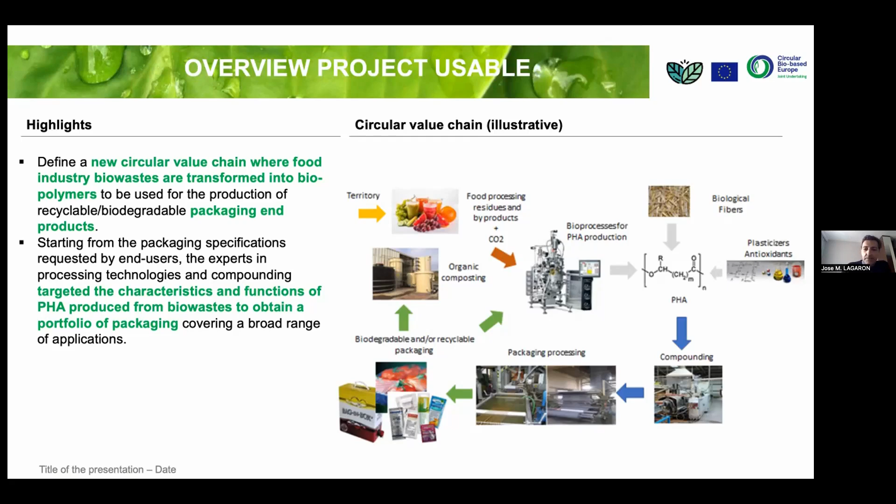The partners participating, as in this typical structure of projects, are based on large corporations that are actually challenging us with some of their existing packaging benchmarks, solutions, proposals or materials that are in the market, and that they are looking into how to replace with more sustainable solutions. And that was, let's say, we took the challenge from each of these large companies.

So the people who actually developed the technologies were SMEs, also supported by a number of research institutes and universities. So in total, around 25 partners from 10 different EU countries. And the CSIC coordinated the whole effort.

So the typical management structure of the project was also used, where there is the coordinator, a steering committee, strategic and general assembly, but then we also had an advisory board composed of companies that were not involved in the project, but were providing guidance and consultancy. And we also had a stakeholders platform that was extremely useful along the way, because they were actually judging the activities of the project from the outside.

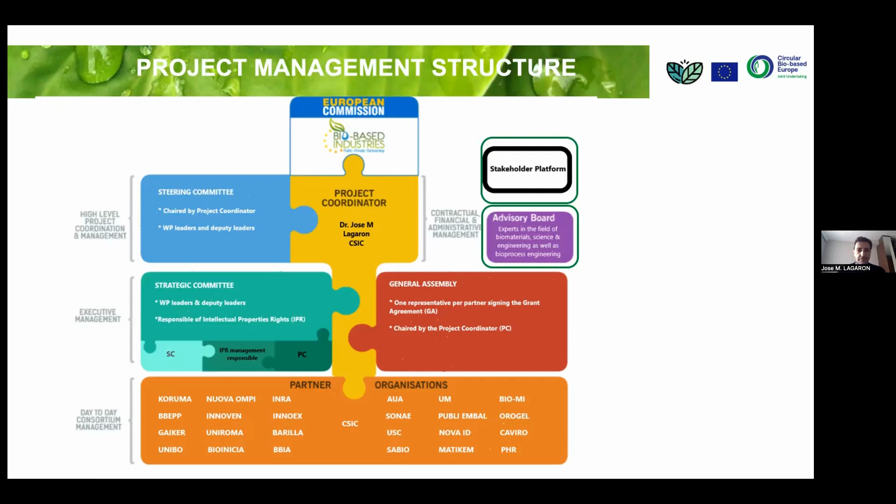The strategic orientation that the project took was based on the proposal made by the CBE JU program in 2018, which was to develop innovative bio-based products to identify market applications.

And then we cover all these activities of developing bio-based products, disruptive technologies that would allow them to show the properties required for replacement, and develop a fully integrated vertical supply chain so that the whole thing can actually work.

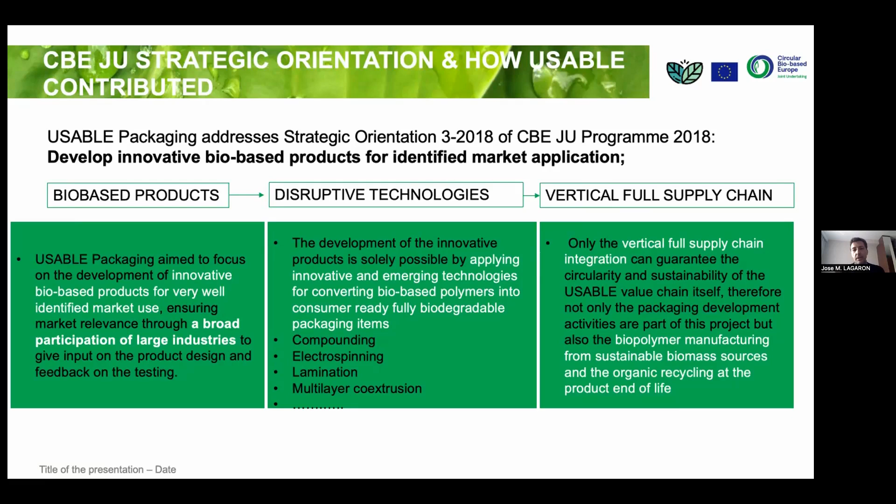So the objectives of the project were, as I mentioned, the creation of a portfolio, a toolbox of biopackaging solutions for a number of packaging applications, not only in food, but also in pharma and even clothing, bagging, etc. So the idea was to develop these biopackaging solutions with very clear end-of-life scenarios.

Considering as the main option organic recycling, but also making sure that if some of this packaging was not industrially compostable and eventually or accidentally ended up in the environment, that we would be able to know what the degrading times would be, etc.

And ideally, those materials would even comply with existing standards in, for instance, marine biodegradation. That is one of the main characteristics of PHA polymers - they are extremely biodegradable in the environment, and we wanted to take advantage of this particularity to make sure that was the case, and we did so within the project.

Additionally, the definition of a completely new vertically integrated circular value chain. We developed solutions to optimize and tailor the performance of these PHA materials to match, as I was mentioning before, the requirements for the end users, in this case the large industries involved in the project.

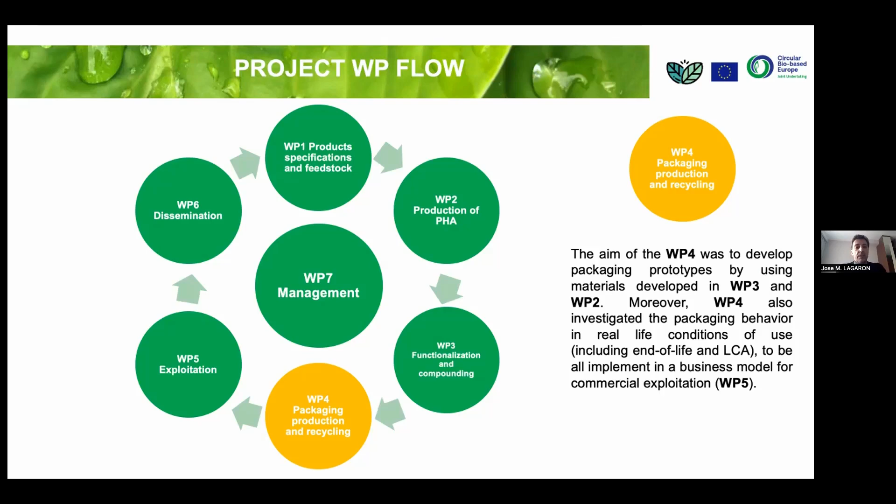Work package 5 was all about analyzing costs and potential commercialization scenarios. And work package 6 was dissemination, and work package 7 was management.

So the chosen prototypes are actually here, all of them, with the exception of one that we were not successful in achieving. It was an injection-molded detergent bottle that we were not able to achieve in the project because of the limitations on the material properties we obtained with the products developed. We understood at least what the requirements were, and this is an open technology that will be tackled separately in additional new projects.

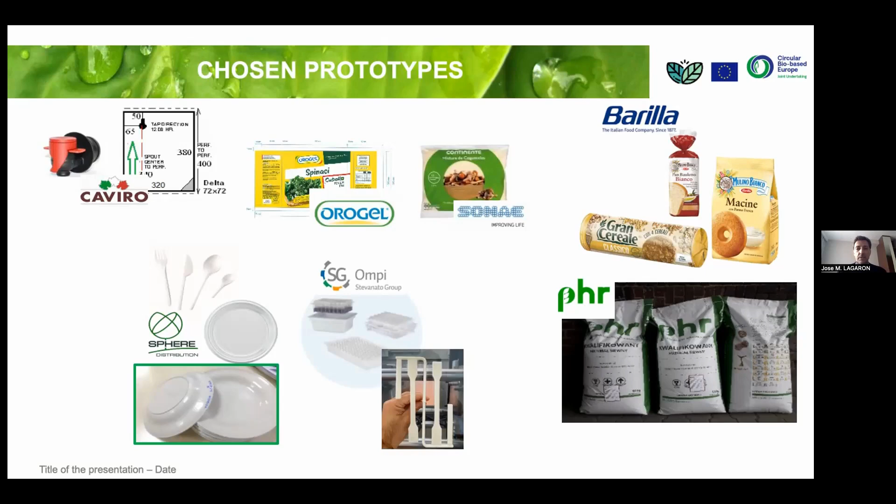But we did succeed in obtaining different POCs for bag-in-box applications, for frozen foods, for packaging of pharmaceuticals, for reusable disposables, bread packaging, and also woven fiber-based bags for seeds and other applications. I will just show in a minute some of how we achieved that.

In terms of the single-use plastic directive, it was really hard on our project, because eventually they consider PHA not a natural polymer. We complained a lot, we wrote letters to the European Commission about it, etc., and we got positive feedback from them, but eventually this material could not be used. So what we were intending to do then, in cooperation with the company interested in this particular application, was the development of reusable plates. Along the way we modified the target—it was a moving target because we didn't know how the directive was going to hit.

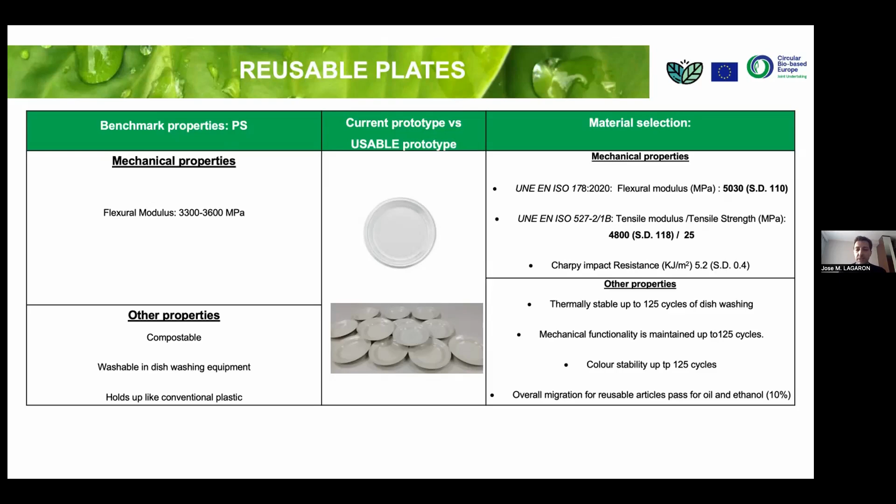Eventually, as I said, it was not positive for the application, but in any case we were successful in achieving replacement of existing polystyrene plates with very good mechanical properties. More importantly, we were able to show that these dishes could withstand at least 125 cycles of washing in washing machines without significant compromise in properties. Overall migration was also met in some cases, and we developed different formulations containing more or less additives that were naturally based or of cellulosic origin, coming from wastes, bio-wastes, etc. My family has been eating off those plates for more than 2 years. We wash them with the rest of the kitchenware, and they're still working fine.

Then there was the bag-in-box application, which was extremely challenging because it required an oxygen transmission rate which today is obtained by combining different materials—metallized PET or EVOH, high barrier polymers in general, and low-density polyethylene, etc. The critical parameter was to obtain an oxygen transmission rate better than 1 cc per square meter per day, and we were successful on that while relatively maintaining the same thickness. It also had to be sealable, and this was all achieved—our OTR was in the range of 0.36, so that was very good.

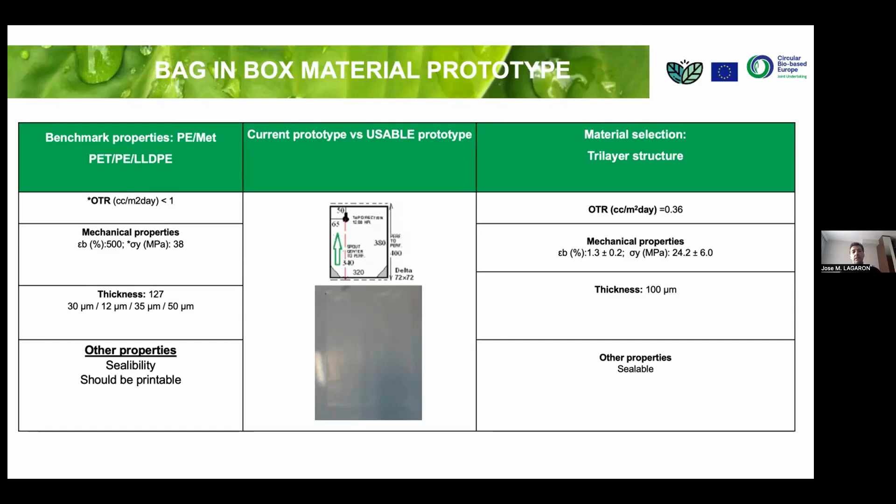In the case of frozen bags, the requirement was sealability, printability, retaining lower thickness, protection, and the ability to produce skin packaging so it would also protect from light, etc. We were able to achieve that, and on top of it we provided antimicrobial properties. It was tested by a supermarket chain in Portugal, Sonae Group, with Continente Retail in the group, and they were very happy with the performance of the material.

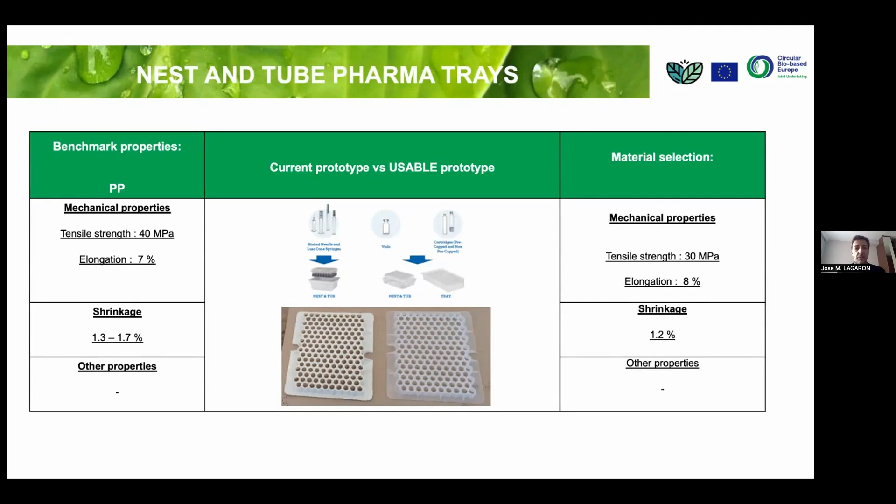Nest and tube pharma trays were also developed by injection molding, and it was extremely amazing how the team involved was able to match the mechanical performance of today's existing product based on polypropylene. Even the shrinkage performance was lower than the existing one, and the large company was very pleased—they said the material processed very well and they would see no issue using it in their conventional injection molding machines. Over 225 pieces were produced.

Of course, in this case we could not use the polymer derived in the project because they had to use 100 kilo—it was a 100 kilo application.

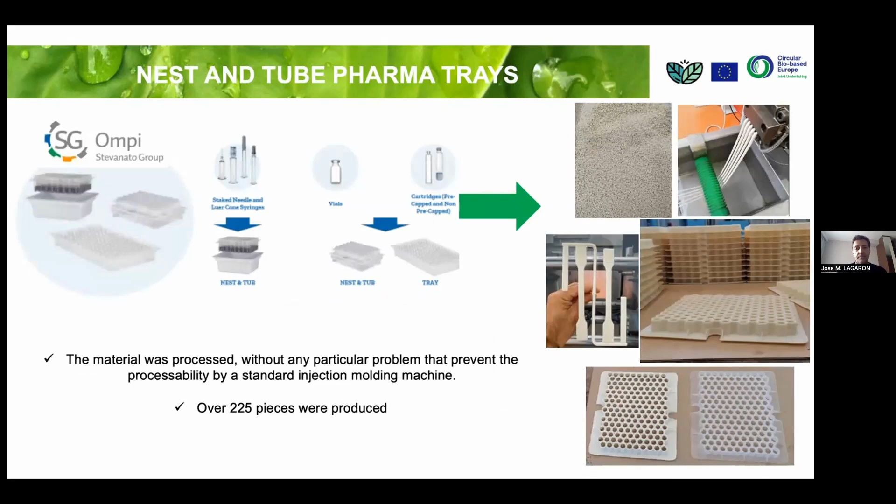In the case of woven bags, it was also a POC developed. It was very challenging because we did not expect the difficulty, so we had to modify even the structure. We had to incorporate other partners that were not initially devised in the proposal to be able to generate filaments and weave them. Even though we were not able to produce a complete pack, we proved the concept, and that was also successful thanks to the effort and ability of the consortium to stay flexible in the face of adversity.

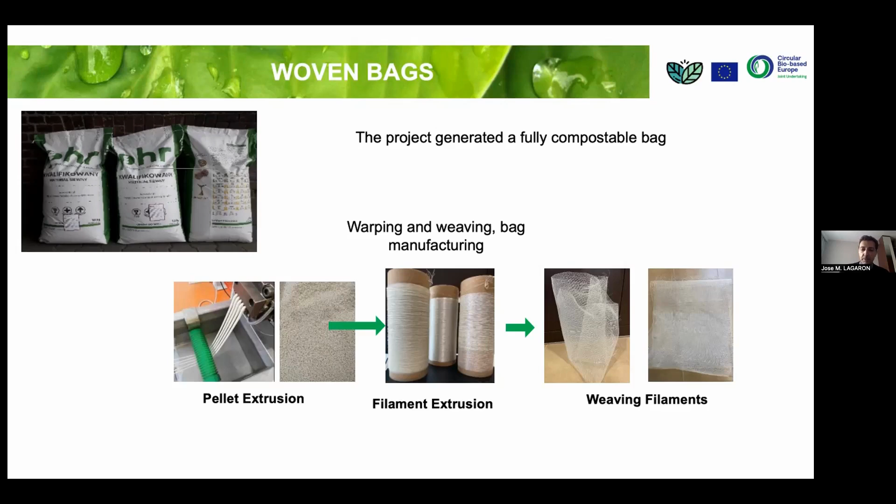Not to mention, of course, that we, like many other projects, were hit by the COVID-19 pandemic, and we had to really work magic to be able to overcome some of the challenges created by this unique scenario.

We were also able to develop bread bags. In this case, it was all made with the PHA that was developed coming from reground pasta.

So it was a completely circular scenario where the residues of making pasta would be used to actually make the packaging that eventually can be used for protecting bread. The challenge there was to get the water vapor transmission rate that is relevant. We combined a disruptive technology with a challenging lamination and film blowing strategies, and we were able to achieve, at least for the bread bag, the barrier properties that were required, and the mechanical performance was acceptable, along with sealability. On top of that, we were also generating two prototypes, one with antimicrobial properties and the other without, with an antimicrobial and antioxidant performance.

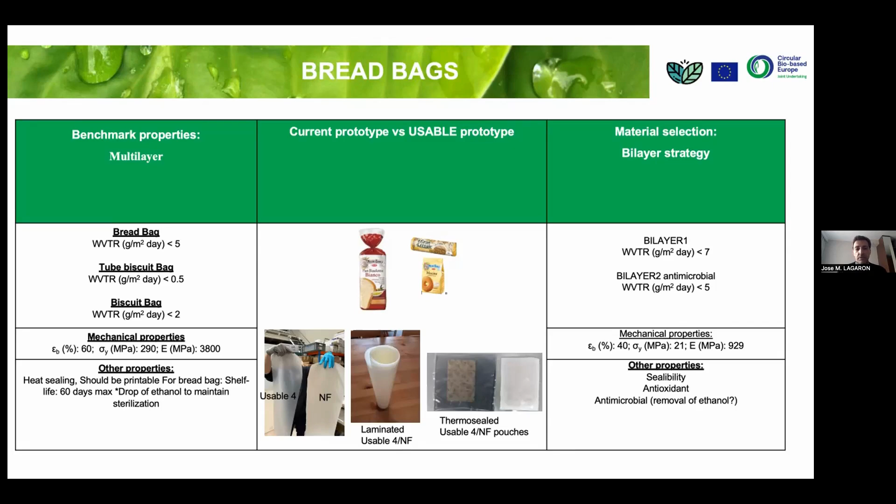So that would be an additional bonus to what we were challenged with at the beginning of the project. And that was, I would say, one of the most challenging applications that we targeted, because there was this disruptive technology involved that was never used before. So on the overall, out of all of these challenges...

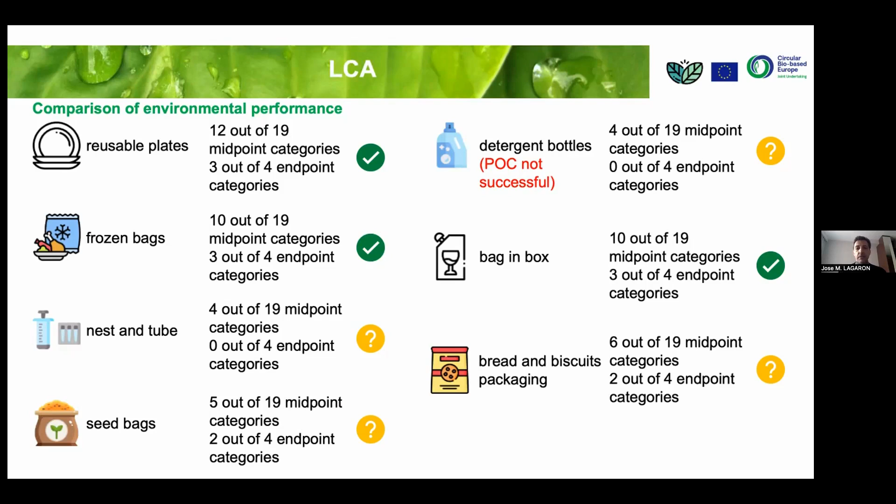As I said, detergent bottles, we were not able to achieve that. We understand now why, and this is going to be the subject of future work. But at least 3 of the prototypes were very clearly showing a more positive LCA than the existing products. For the other ones, there was not enough information, but that does not necessarily mean that they will not be able to achieve that. But at least 3 of them were very clearly showing a more positive LCA.

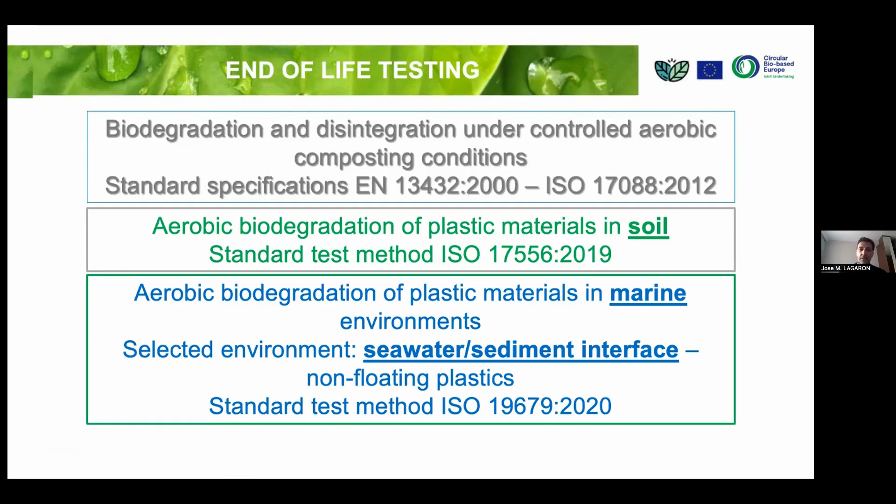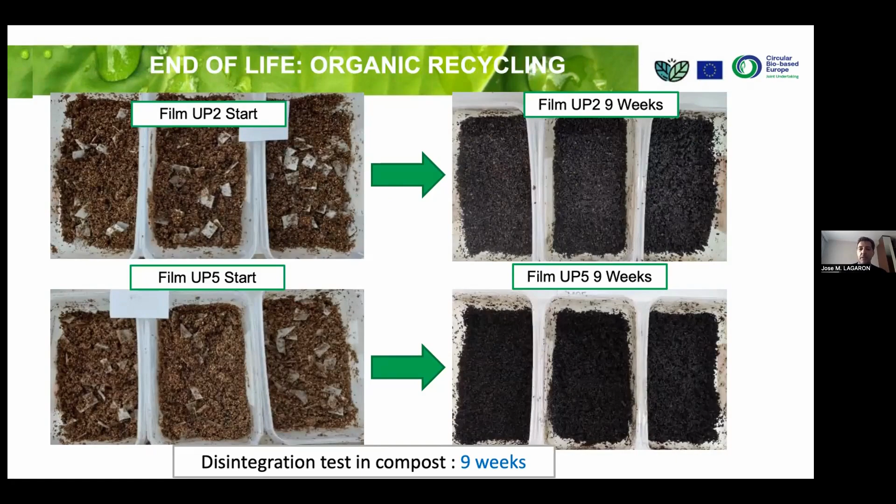In terms of end-of-life testing, we did test the biodegradation under different conditions, not only the organic recycling strategy that would be industrial composting, but also soil and marine biodegradation. This is just one example, but many of them passed, or some of them passed all of the tests that were required. All of them passed the organic recycling in terms of disintegration, biodegradation, and ecotoxicity. So we were very, very pleased to see that.

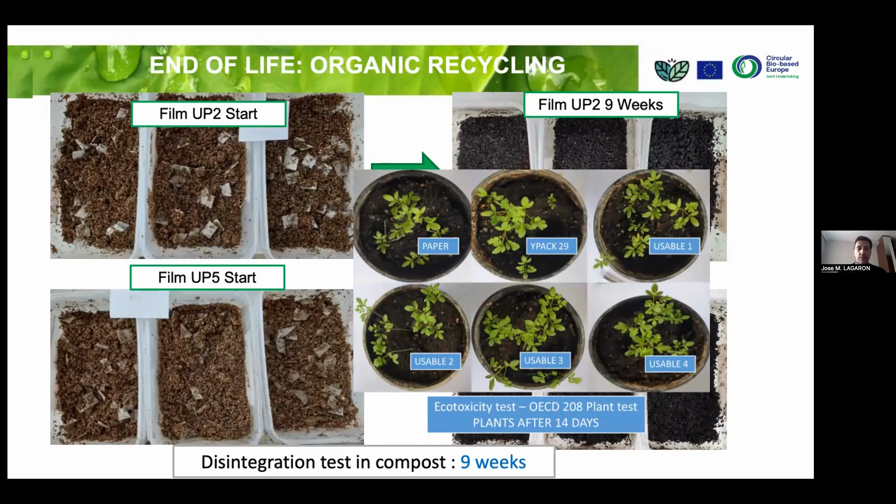And with this, I come to the end of my talk. Thank you very much for your attention, and maybe I would be able to answer some of your questions if I have the expertise for it. Otherwise, I'll just direct it to the right partner.

Thank you. Thank you, Jose. So it was very nice hearing this kind of overview about your project and where you started and where you land. I would like to check if there is any question in the room and online.

I'm keeping an eye. Otherwise, I would like to ask you the same questions that I was asking Marta. How did you try to connect to your stakeholders here? So we're talking about engaging with the industry. Some of them were in the consortium. But did you find other ways to reach out a bit more broadly? Maybe can you elaborate on this a bit?

Yes, sure. So we have a partner, which is the director of the BBIA, the Bio-Based Industries Association, highly networked. So he was able to pull in, I think, over 100 outside partners in the project. Some of them, and we organize meetings with them, coinciding with our project meetings. Some were physically present, some were remotely connected, but in many cases there was a reasonable attendance, and we really benefited a lot from that.

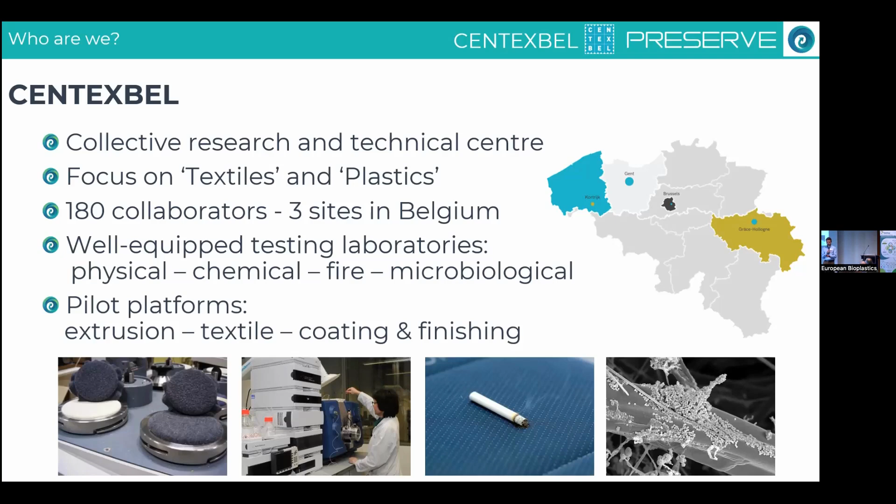Now for Preserve. The reason we started with Preserve is because there is a need for high performance bio-based packaging to meet the European sustainability goals. But to achieve this, we need to do a few things. First, we need to enhance the properties of some of these bio-based packaging materials to meet current industry standards. We also need to look at how we can recycle and recover these bio-based materials, because it's very nice if we can make everything out of PLA, PHA, or some other alternative, but if in the end we can't recycle it, then what are we doing?

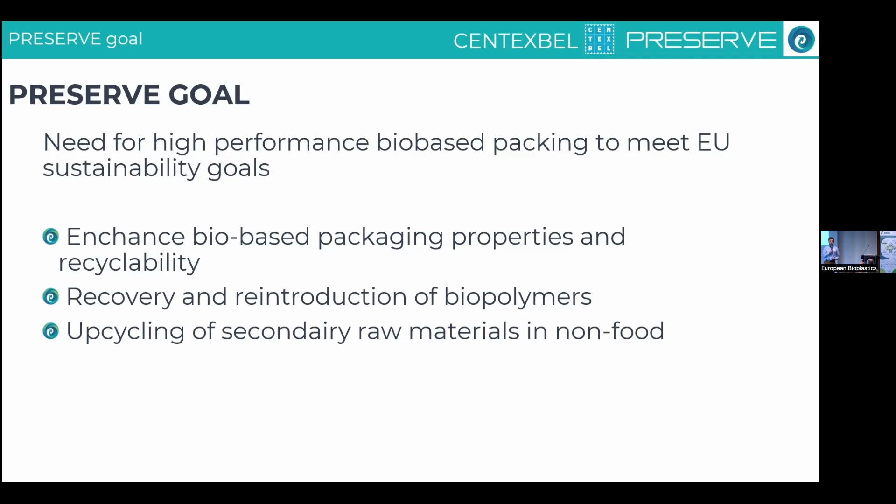And then finally, looking at upcycling of some secondary raw materials. Mainly if we look at non-food materials, if we end up with some blends of different polymers, how can we recycle them or even upcycle them into different materials?

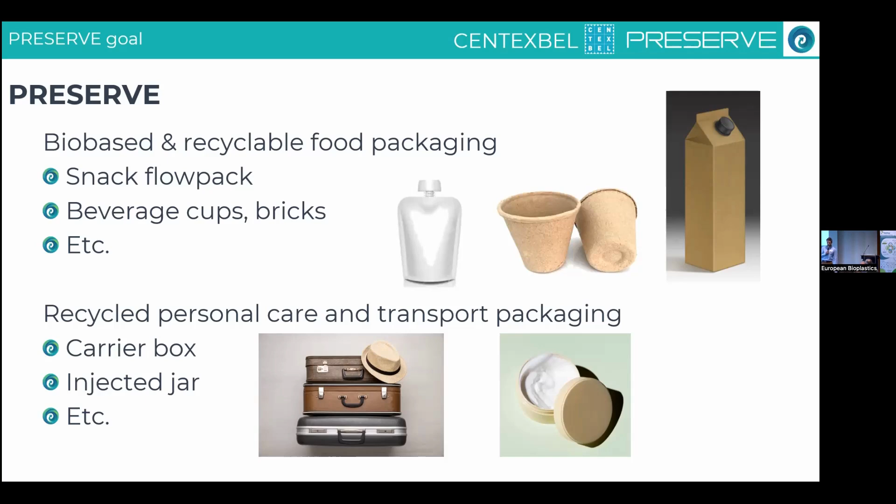Concretely for the project, we have a few demonstrators that we work towards. On one hand, there are some food packaging related demonstrators, such as a flow pack or some beverage cups and beverage bricks that can be used for all kinds of drinks or food applications. The second half is more related to recyclability and upcycling strategies. The goal here is to develop different types of carrier boxes, injected jars for example for cosmetic applications, and so on, using these recycled materials.

Of course, this is something we don't do on our own, so there is a whole heap of partners working on this project, and it's coordinated by Iris Technology Solutions.

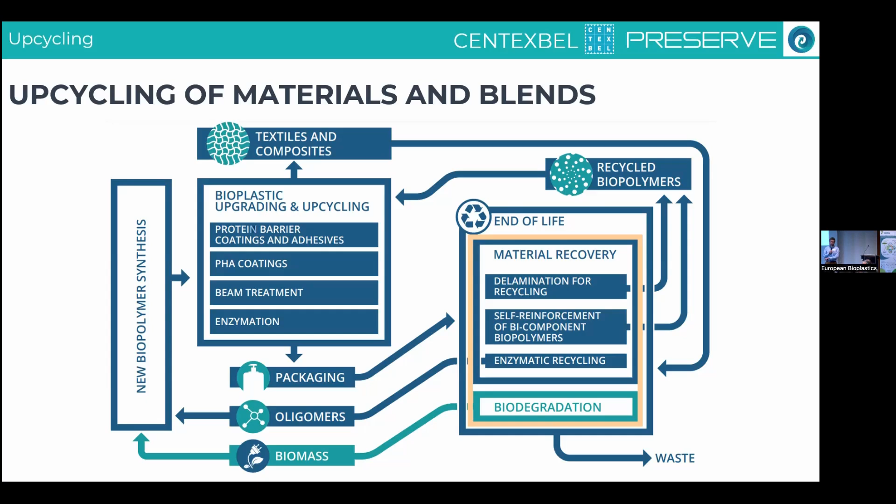So first, when we look at some self-reinforced materials, the goal here is to look at what happens if we blend different materials that are supposed to be immiscible. An example here is using a high fraction of low density polyethylene and blending this with a very small fraction of polyamide. If we do this properly in film extrusion, we will see that the polyamide will form these kinds of microfibril structures within the film itself. In the machine direction, they are really elongated, and you get a composite material made from a matrix of polyethylene with a reinforcement of polyamide.

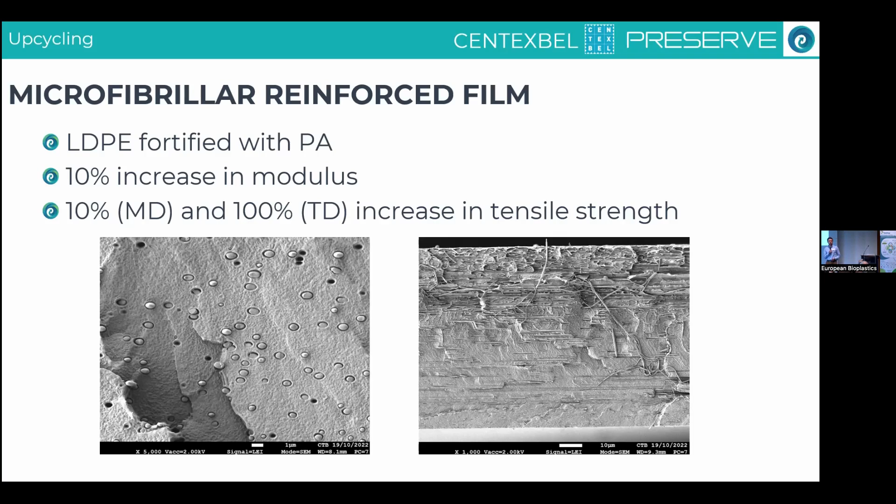And this resulted in an increase of 10% in the modulus and an increase of 10 to 100% in tensile strength, thanks to the addition of the small fraction of polyamide.

Now then, another thing we investigated is looking at self-reinforced PLA. This is something we have been doing at Centexbel for quite a long time already, more in composite applications, but now we are also looking at what happens if, for example, we have a waste stream of PLA and we want to improve the properties of this material so that it can be used a few more times. In that sense, it's interesting to look at self-reinforced PLA.

The goal here is that you work with a low melting point and a high melting point PLA, and by blending these and processing them at the right temperature, you once again get these microfibrillar structures, as you saw in the last picture. But this time, instead of using polyethylene and polyamide, we use a low melting PLA and a high melting PLA to get these self-reinforced structures. Here we see an increase of about 25% in modulus for these self-reinforced blends compared to just the virgin PLA.

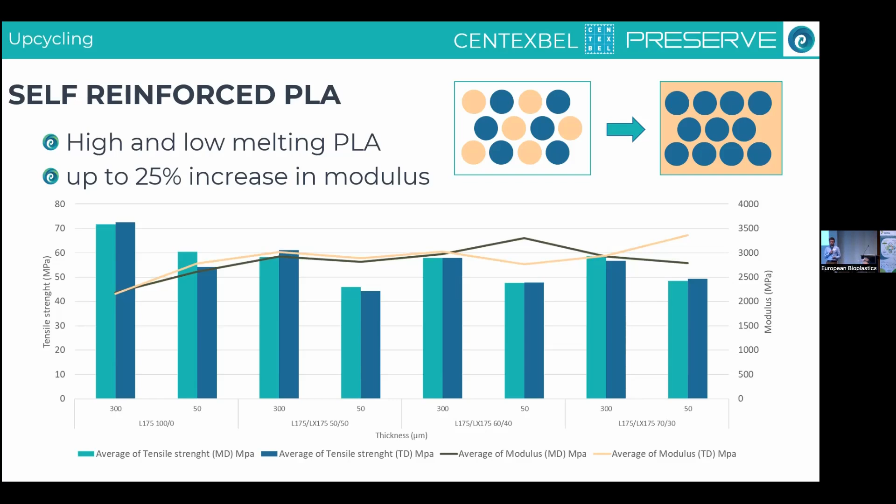And then finally, for the recyclability aspect, we also looked at the home compostability of PLA. The aim here was to add an enzymatic master batch developed by Carbiolice into PLA and see the effect of this master batch on the biodegradation under home compostability conditions.

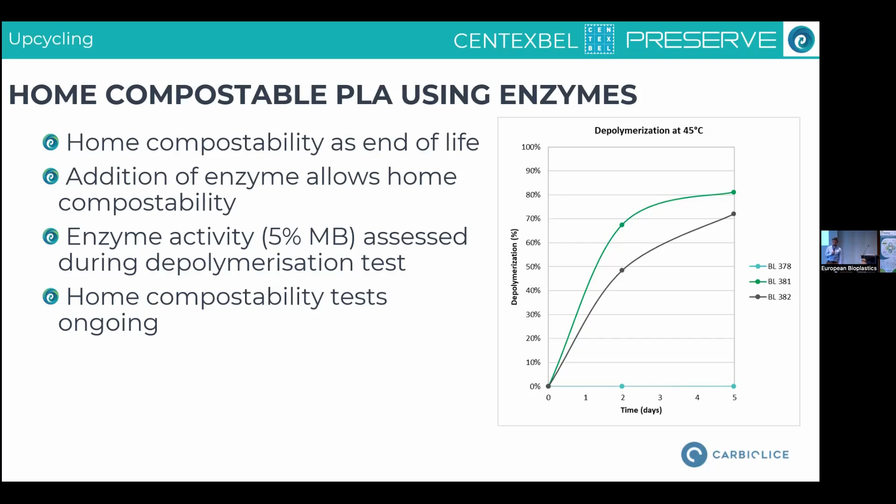You see the reference PLA on the bottom in blue almost does not depolymerize under these conditions, while addition of about 5% of this master batch drastically increases the speed of depolymerization. These samples are now also submitted for home compostability tests, but the evaluation of these materials under home compostability is still ongoing.

Then the second aspect that we performed at Centexbel is related to coating activities, and more specifically coating of PHA. So the goal here, or how we came up with this, is how can we make traditional polyethylene paperboard packaging easier to recycle? And also, can we switch to more bio-based solutions, replacing this polyethylene by a bio-based material?

In this sense, PHA is quite an interesting material because, also from articles, it's known that it can have quite good water vapor transmission rate barrier properties. So it's very interesting to look at PHA for these kinds of bricks, cups, trays, etc., as a barrier layer.

So maybe a little bit of background. I know it has been explained a lot already on PHA, so I will go over it quickly. But essentially, PHA is a bacterial polymer that is made when these bacteria are in an environment with a lot of carbs but not a lot of nutrients.

In that sense, they will store these carbs as some kind of internal fat layer in the shape of these PHA polymers. What is quite interesting about them is that they are thermoplastic, which allows quite a lot of processing, and also that there is quite a lot of variation in PHAs. A PHA is not one specific polymer, it's more a group - similar to how you have a large array of polyolefins like polyethylene and polypropylene, you also have a large array of PHAs.

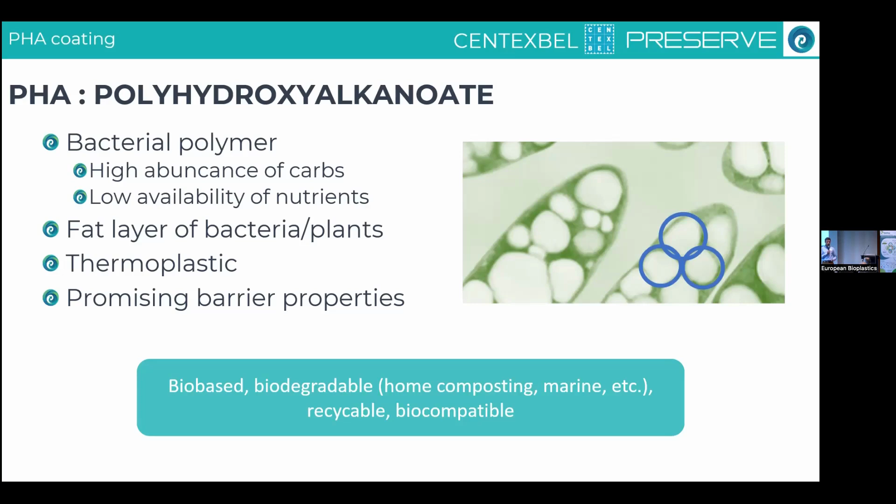And as I mentioned, they are quite promising due to their barrier properties. They are not only bio-based, they are biodegradable in a range of environments. They are recyclable and they are even biocompatible. So quite an interesting product.

The issue, however, is how do we turn this PHA powder or pellets into an actual nice and homogeneous barrier coating? For this, we took inspiration from the PVC sector, where they use something called a plastisol. In that sense, they mix a thermoplastic powder and a plasticizer, they heat it, the plasticizer is absorbed by the thermoplastic powder and it gels into some kind of a homogeneous coating.

So we tried the same approach. It worked for PLA, it works for PHA, and also optionally we sometimes include some water and processing additives to make sure that the coating behavior and the flow of these materials is to what is needed.

Now then, for some of the properties and details: this PHA coating is applicable on paperboard, which is of course quite important for this project. We are able to fuse this material into a coating by heating it for only 2 minutes, which solves a lot of the thermal degradation issues that PHA has, since with only 2 minutes we can obtain a nice and homogeneous layer.

Since we're working with food contact materials, all the components that we use within this PHA-based coating are food contact approved. And initial evaluations show that this coating fully disintegrates after only 29 days.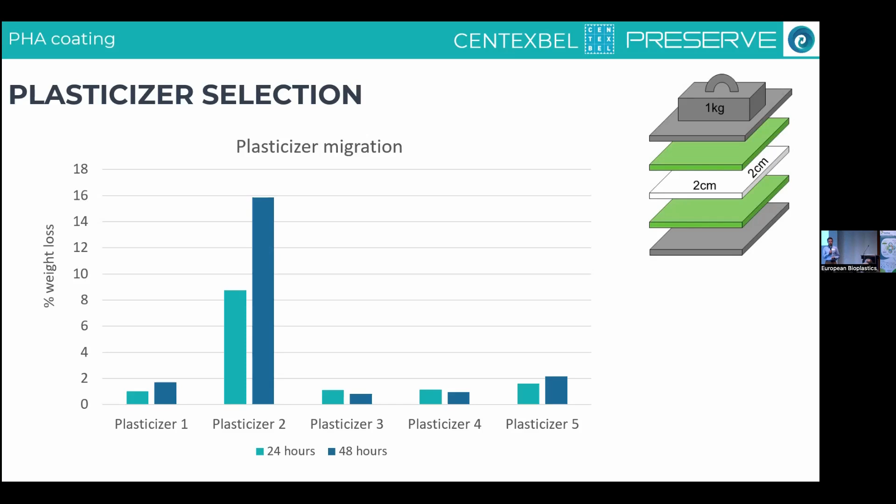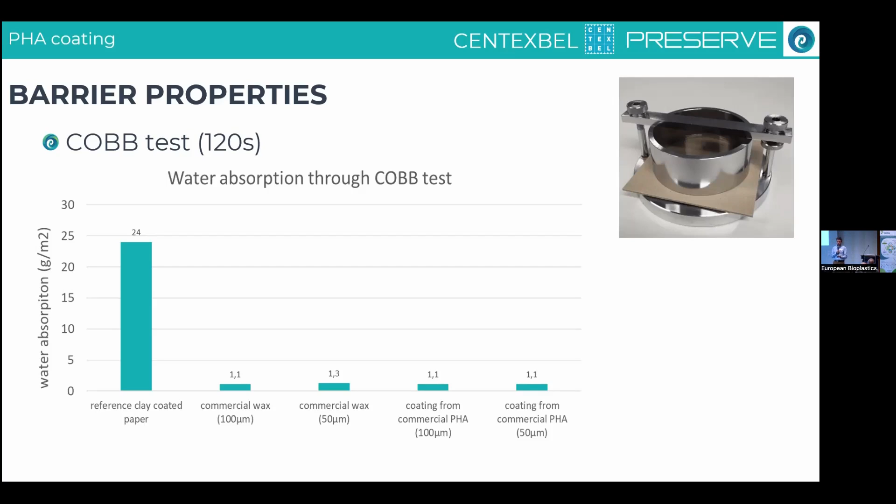For the barrier properties, one of the properties we started measuring is the COBB test, which determines how water gets absorbed into the paperboard. The less water absorbed, the better. We see that the reference paperboard absorbs about 25 grams of water per square meter in 2 minutes, while for our PHA coatings we are at a value of about 1.1 grams, which is actually quite similar to some commercial wax-based solutions already used for these packaging materials.

Another important barrier property is the water vapor transmission rate. We compared PHA foils and PHA coatings under different conditions. For some of the latest developments, we get a water vapor transmission rate of about 70 grams per square meter per day. Since about 2 days ago we got better results, getting this down to about 30 grams per square meter per day at 38 degrees. This is not quite yet what is expected from the industrial partners within the Preserve project, but we are about a factor of 4 or 5 away at the moment. We hope to achieve this within the next 2 years that the project is still running.

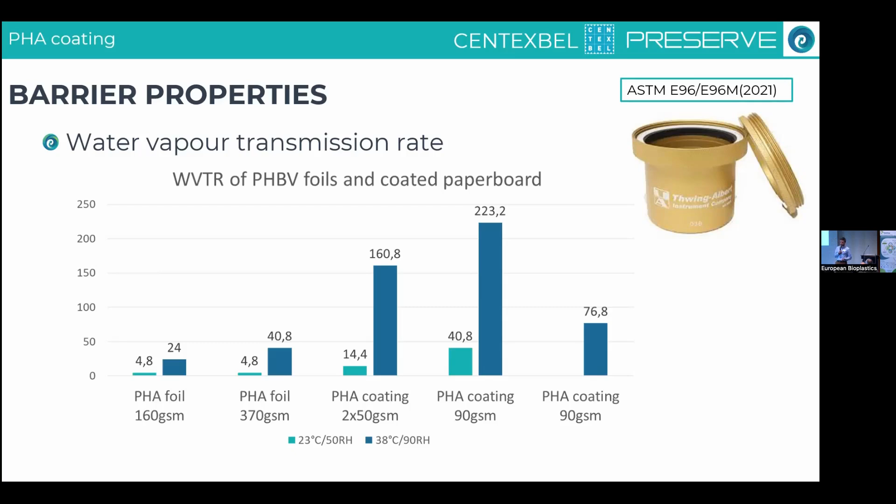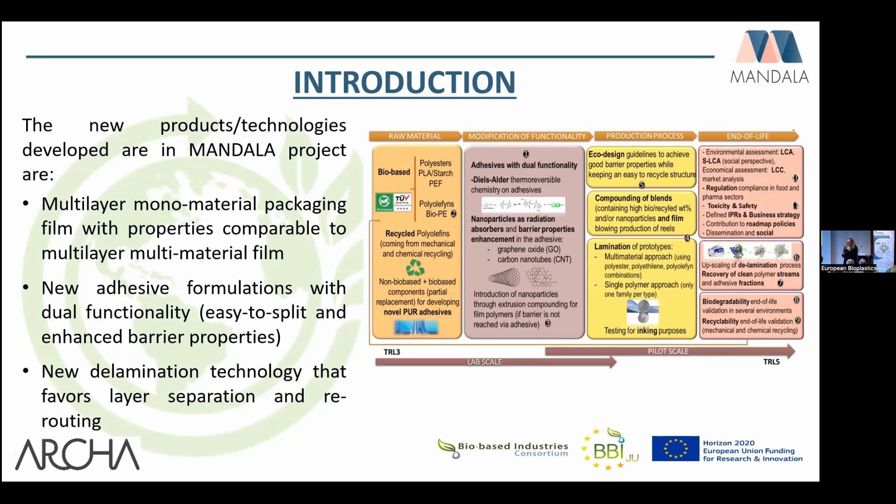Okay, our main pillar that we need to focus on, from the ECHA point of view, ECHA activities, was the evaluation of the sustainability, especially for the eco-design of the packaging at the beginning of the project. This was performed thanks to another partner that was involved, especially in the eco-design part.

The reduction of the fossil-based materials, and both this activity and all the developments during the project were validated through the life cycle studies in terms of environmental and economic point of view.

The second pillar was the evaluation of the end-of-life options. So, as Marta already said, we developed mainly 3 formulations. One of them used already biodegradable material, combined with a new formulation to assure and provide the specific performances for the conservation of the specific food, and also for recycling performance. So we need to consider both these aspects in terms of compostability and recyclability, and I will provide you the results for the compostability.

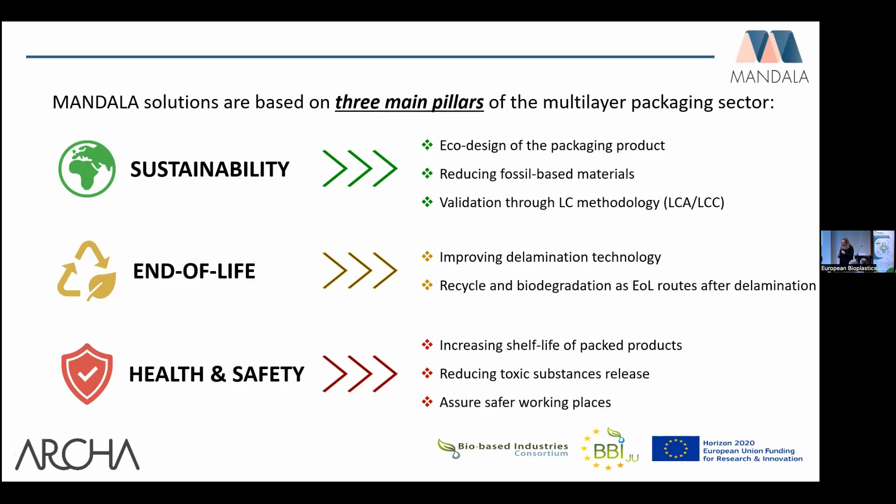So we produced 2 different demonstrators, as Marta already said, one for food application and one for pharma application. What I'm going to describe is the food one, which has the specific biodegradable and compostable formulations. Obviously, the pharma formulation also has aluminum foil as a cover for the packaging, so we didn't perform the biodegradation and compostability tests on this material.

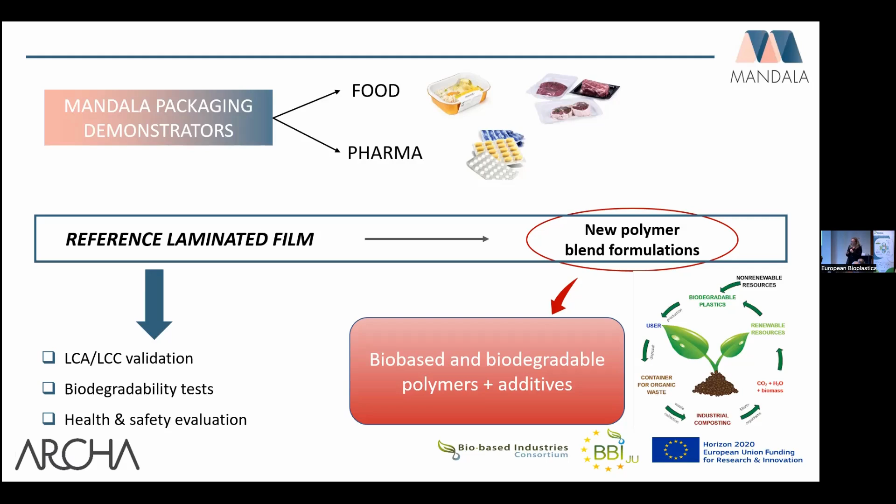To evaluate the final sustainability of these products, we compared them to a reference benchmark material, the traditional film already on the market, with the new formulation we developed during the project. This validation was done across all 3 pillars. Something is still ongoing, as I said, and something is already achieved, but we needed to wait until the end of the project. Let's see.

The goal of this validation was to assess the environmental and economic impacts of our product, and we performed this by comparing the traditional product with the new Mandala 1. We used 1 demonstrator as the functional unit. We considered this because some data were not on the same scale, on the same dimension, so we needed to compare the raw material used for the Mandala product and the benchmark one, and their end of life.

So their cradle to grave, let's say. This is due, as I said, still for the benchmark product. As you can imagine, we have the industrial data coming from all the production, all the film, extrusion, or whatever is needed for the process. Instead, for the Mandala one, we reached TRL 5, so we only have pilot scale production. It's important not to compare these very different dimensions of production.

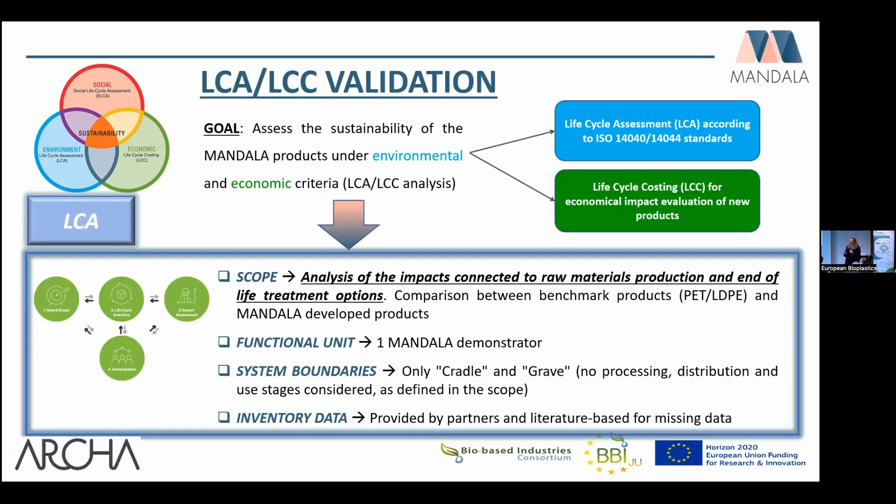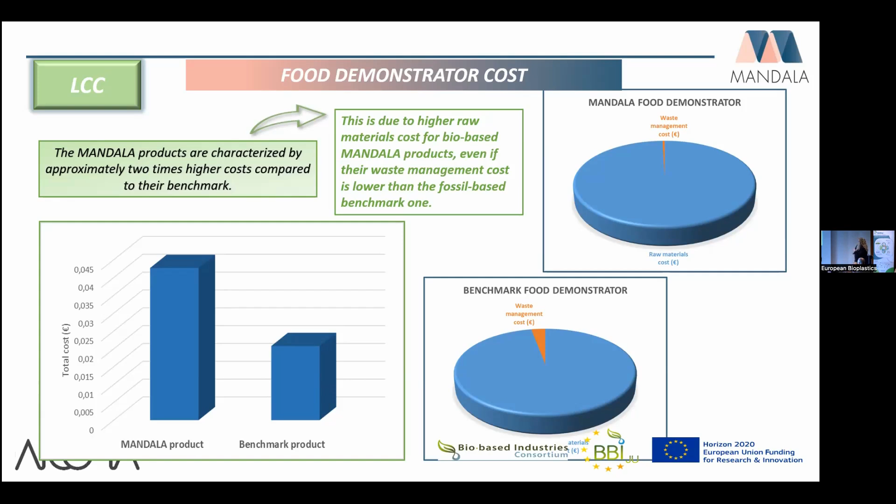Then we performed the validation for the end of life option, applying the standard methods defined in EN 13432 to evaluate and comply with the requirements for packaging recovery under composting and biodegradation. For the final demonstrators, we verified and complied with the industrial compostability conditions for all the parameters and requirements under industrial composting conditions, for chemical characteristics, biodegradation, disintegration, and ecotoxicity.

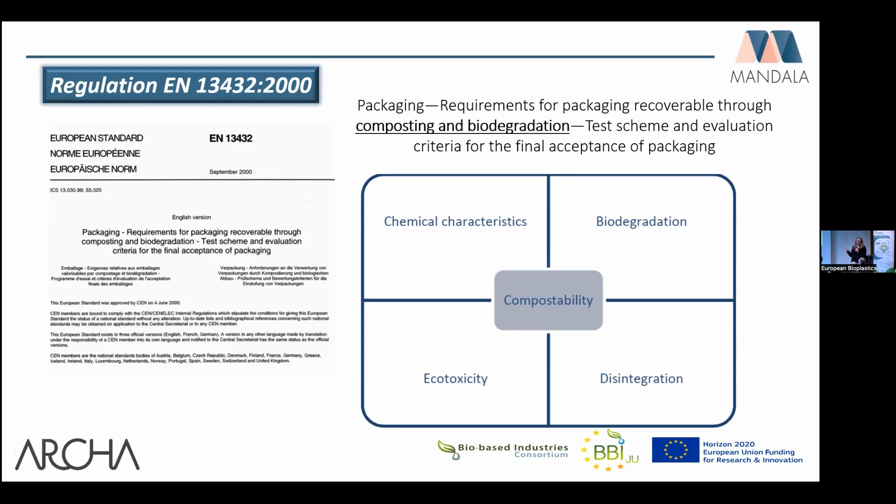This was verified for the film final demonstrator, and we performed further tests to evaluate the preliminary behavior of the biodegradable formulation in different environments. For biodegradability, we performed the test according to ISO 14855, and quantified the CO2 produced by the polymer used in the formulation under aerobic conditions, determining the percentage of biodegradability compared with the organic carbon in the polymer. The requirement is that biodegradability must be more than 90% within 6 months.

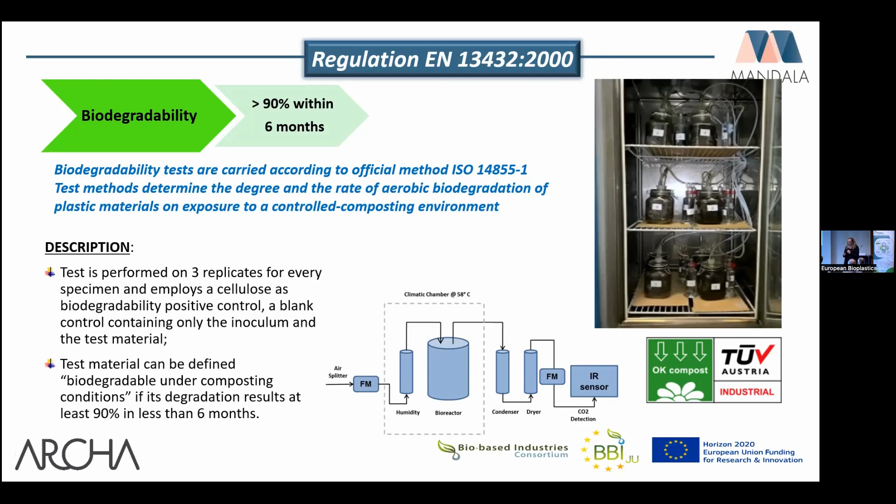All this testing was performed according to the OK compost industrial scheme provided by TÜV Austria. For the disintegration test, we applied another important standard to assure our materials are compliant with the requirements: ISO 16929. We used pieces of the film inside the compost in an inoculum and followed the test for 12 weeks. At the end, we needed to verify that more than 90% of the initial material, by dimension, is below 2 millimeters by sieving with a sieve of 2 millimeters hole size.

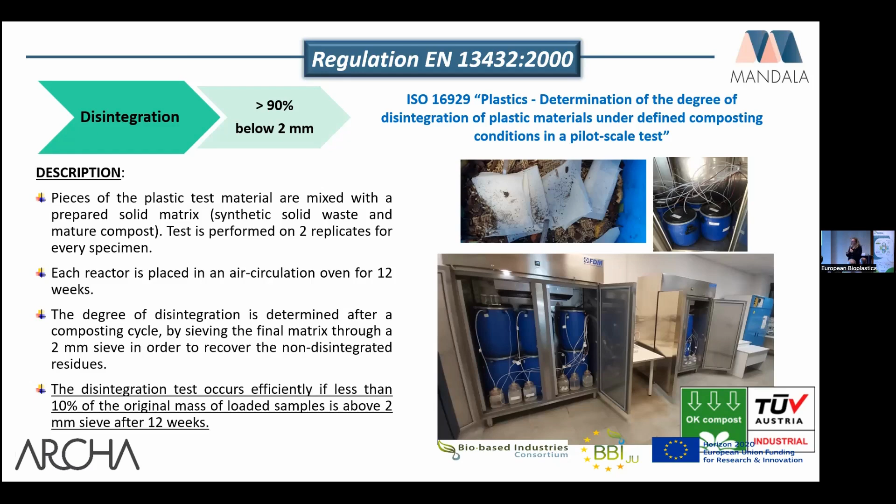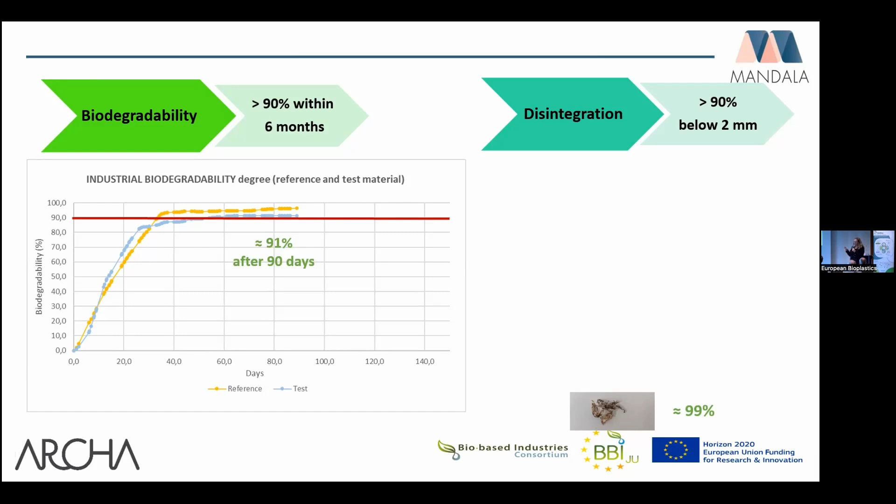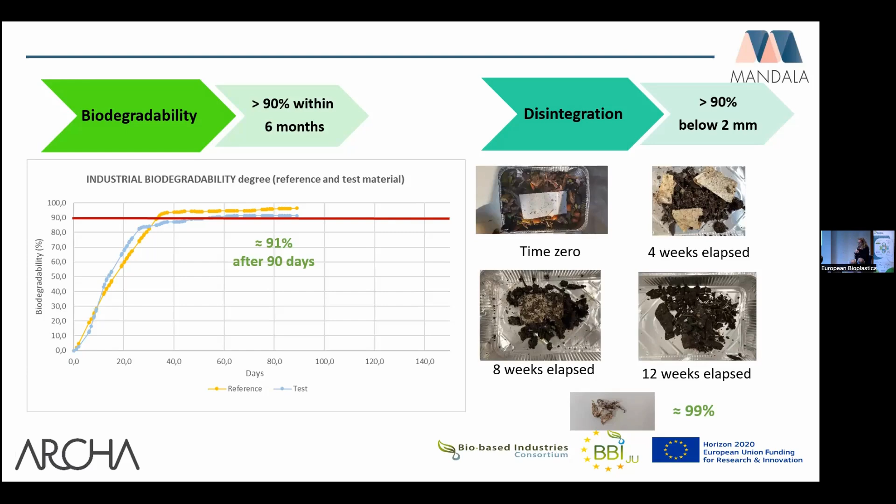What we obtained was about 90% at the plateau level after 90 days of industrial biodegradation percentage of the formulation. So biodegradation is compliant with the requirement. For disintegration, the same applies, since we achieved more or less 99% of material below 2 millimeters in dimension after 12 weeks.

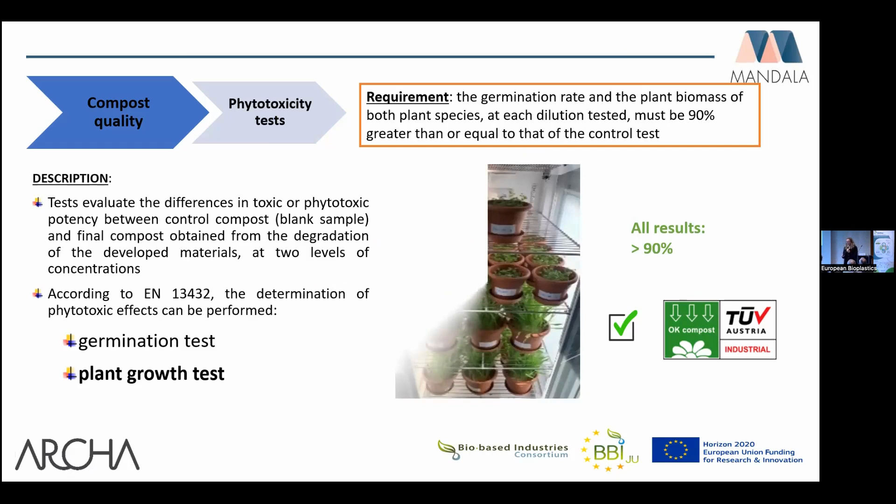We also performed the ecotoxicity test according to the same standard, in particular OECD test 208, evaluating both germination and plant growth tests. We evaluated two different seeds for the plants, and all the results obtained by comparing the compost after disintegration of the plastic sample with a blank compost that had not been in contact with plastic material showed more than 90%. This parameter is also compliant with the requirements.

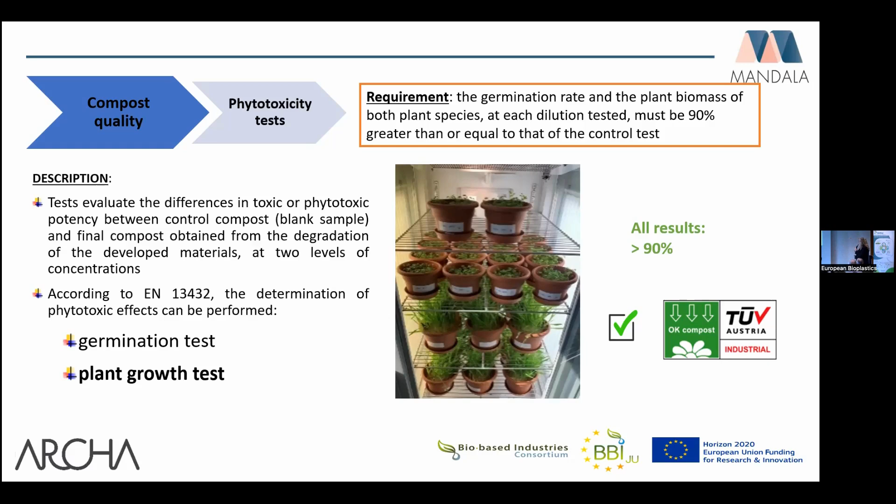So our final demonstrator for food packaging is compliant with the certification scheme, and it could be certified according to OK compost industrial protocols.

We performed also some preliminary tests on the 4 different environments that we can apply on this plastic material to verify their biodegradability property. We performed the test in water, fresh water, and we achieved 93-94% after 56 days for the preliminary formulation.

Without, as you remember from Marta's presentation, we used an adhesive. We didn't test this adhesive in the formulation. In addition, for the home biodegradability percentage, we achieved 92% after almost 250 days.

For the marine biodegradability test, we achieved almost 94% after 50 days. This is a strange result, but we needed to confirm it with the final optimization of the formulation.

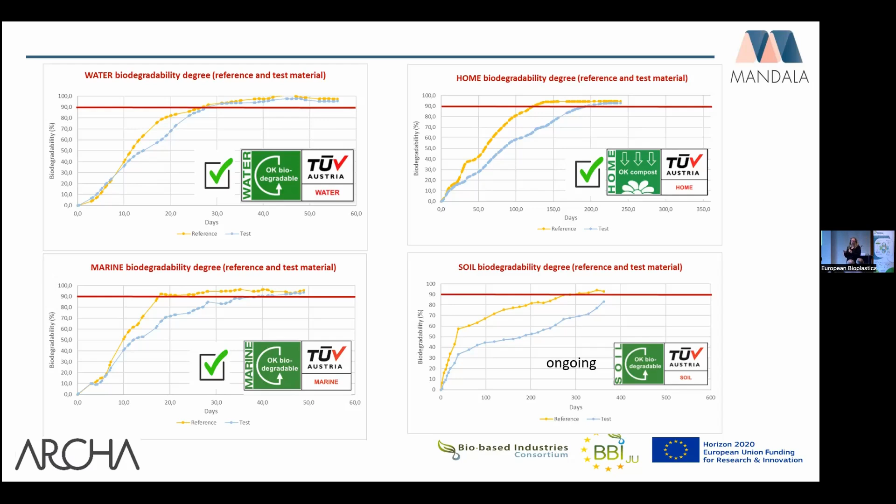And for the soil biodegradability test, we are still running since we started more than 1 year ago. The test is not finished yet, but we achieved 80% after 1 year, and we need to check if we will achieve more than 90%.

On the other side, we achieved and demonstrated their compliance with the requirements of biodegradability and compostability under industrial composting conditions for the developed final formulation, and in other environments as well, but we need to confirm them in the future, I hope in another research project, but we will see.

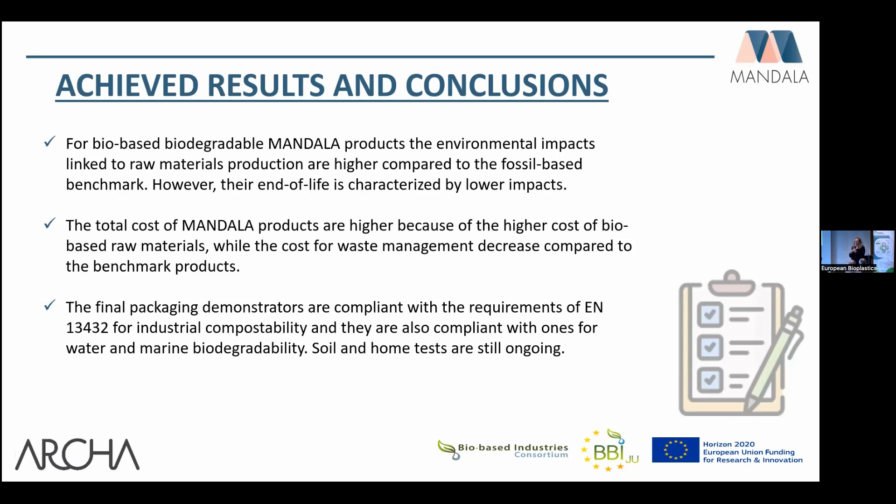Microphone, can we go there and use that microphone?

Okay, Francesca, I think we're all running out of time in terms of these projects. Everybody's rushing up with test and validation by the end of May. But I was wondering, normally after these projects there is some time to continue a bit of work and testing. So when do you think this kind of final results will be available? Maybe in autumn? Because this is the question we get when we are at the fair. So when do we see this stuff happening?

Well, it depends. For the LCA and LCC studies especially, we are collecting, and have collected, several new data in these days, so I cannot provide that today. As you know, being involved in research projects, the last months are the most demanding but also rich in results that we need to elaborate and understand better. So data collected even 1 week ago cannot be provided in a conference in an official way. We need to provide the last deliverable at the end of May, as in the BioNTop project, I know.

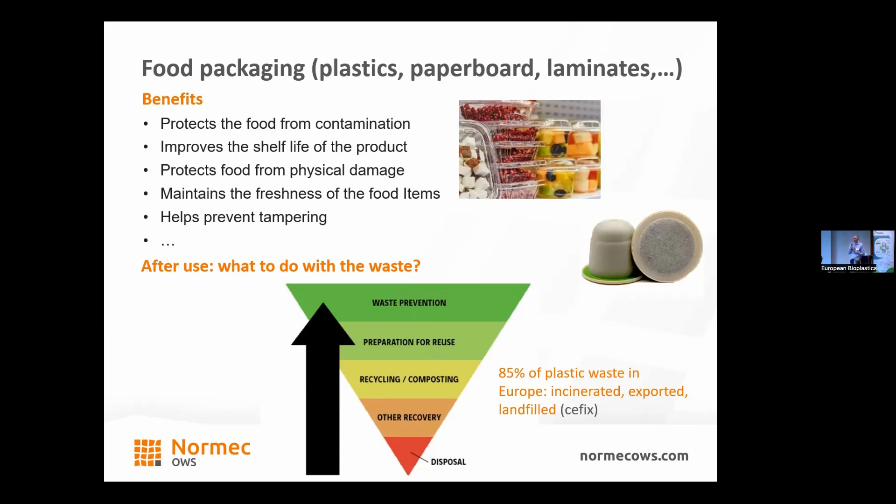Now, recycling of plastics can be done in many processes. Conventional plastics typically are now mainly recycled mechanically - you recycle the plastics back again, you have it. Often it is down-recycling, and even in the best case, like for PET bottles, the recycling is limited. For PET bottles, on an average basis, you can recycle it 3 times before you get too much degradation due to this process.

Also, recycling by dissolution is done often, but also in this part, you have to add the original polymer back to have a good product. So keep in mind that it's not completely circular.

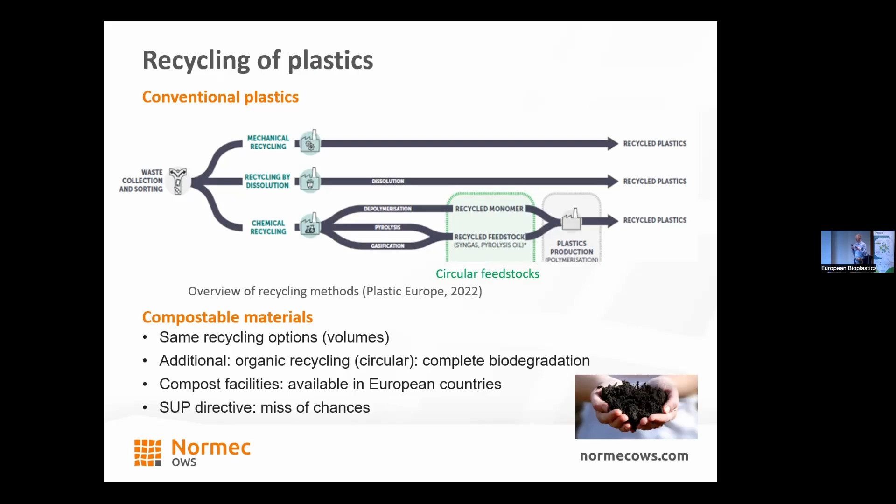But also keep in mind that for paperboards, a lot of chemicals and biocides are sometimes used. So we are putting that back into the environment, and maybe we are not doing the right thing there.

Next, the role of compostable materials is getting recognized in Europe. They have an EC communication on the EU policy framework for bio-based, biodegradable and compostable plastics, and they see two main benefits for this type of material.

The first is that there's a higher bio-waste capture, when we get more organic waste into the composting bin, it's a benefit for our environment, for our world. And also when they lower the contamination of compost by non-biodegradable plastics.

So there are four suitable applications where compostable plastics should replace conventional plastics. One of them is fruit and vegetable stickers, which is logical—you can treat it and throw it away immediately together with your food. Tea bags, filter coffee pods, and also very light plastic carrier bags.

This is also included now in the proposal for the revision of the EU legislation on packaging and packaging waste. So these four materials will have to be compostable in future.

But of course, for us, it's not only limited to these materials. There are many more food contact products which are suitable and which will increase the organic waste going to a composting plant. Also, for materials like laminates and blends of plastic, they are hard to recycle.

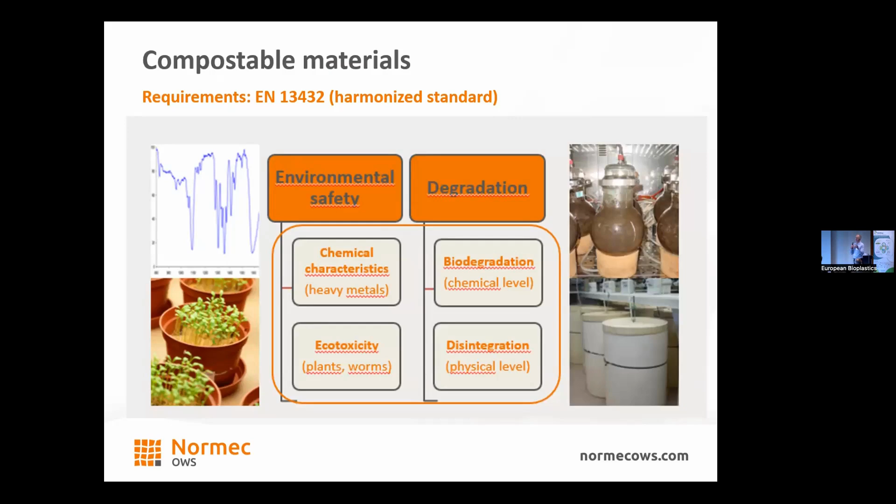First, you have to demonstrate that your material is fully biodegradable. On a chemical level, the carbon of your material should be converted into CO2. And the disintegration should be sufficient that your material is not visually disturbing your compost at the end of the test.

Now let's get a few more words on biodegradation. For us, the only scientific proof and the correct parameter is the conversion of carbon into CO2. It's not a reduction in molecular weight, and it's not a carbonyl index. That can be the first sign, but it's not proof of really final, complete biodegradation.

The pass level that should be achieved is 90%, absolute or relative to a reference material. Here you see a nice graph of the biological pathway for aerobic degradation. The carbon is converted, with the addition of oxygen and microorganisms, into CO2, water, residual carbon, and carbon biomass. For this lab testing, we only follow up the carbon in the CO2.

That's also the reason why 90% biodegradation is considered sufficient, as the carbon in the biomass is not considered, and it's often released only very slowly.

Still, there is an additional requirement in many standards, not yet in the European one, that components in a material between 1 and 10%, or even at ISO level between 1 and 15%, have to be tested separately for biodegradation. This means you cannot make a starch-based material anymore with 8% polyethylene - it will not pass this testing. Still possible in effect in Europe, but it should and will be changed.

In OECD, which also has guidelines on biodegradation mainly for chemicals, you only have to reach the 60% pass level. But for us, if you have 90% biodegradation, it's proof of complete biodegradation, and you have no microplastics occurring in the environment. So that's beneficial compared to other conventional plastics.

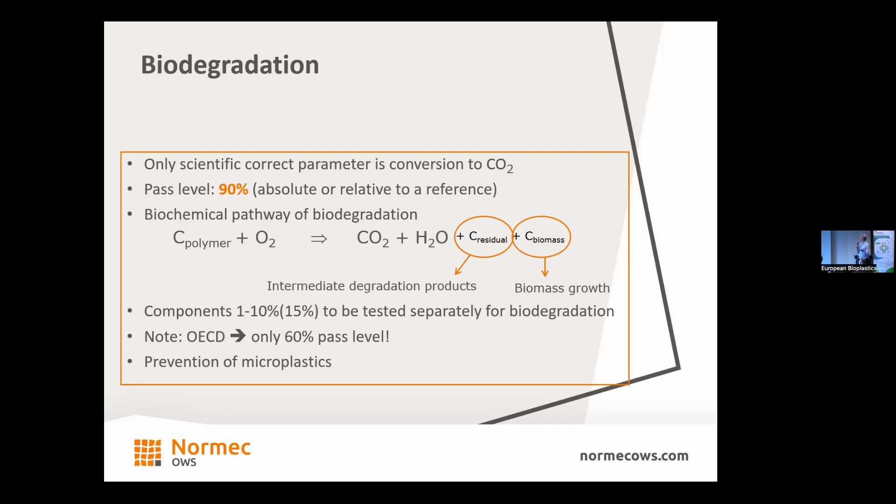Now, biodegradation has a lot of opportunities, but these can also be useful in certain environments where you submit a material - in soil, freshwater, and marine conditions. As you can see, a lot of agricultural products are used and will end up in the environment, also nets for protecting your materials. This is also interesting.

These are slow release fertilizers. The coating is often made of a plastic, and often just plastics that are not degrading, so we're just putting plastics into the fields, into the agriculture zones. That's not what we want. It's logical that these should be degradable, only of course at a slow enough rate to release the nutrients not too fast.

Other applications are mulch films - also not so nice - and tree guards, plastic for protection of plants. So for these materials, for these applications, biodegradation can be an interesting characteristic.

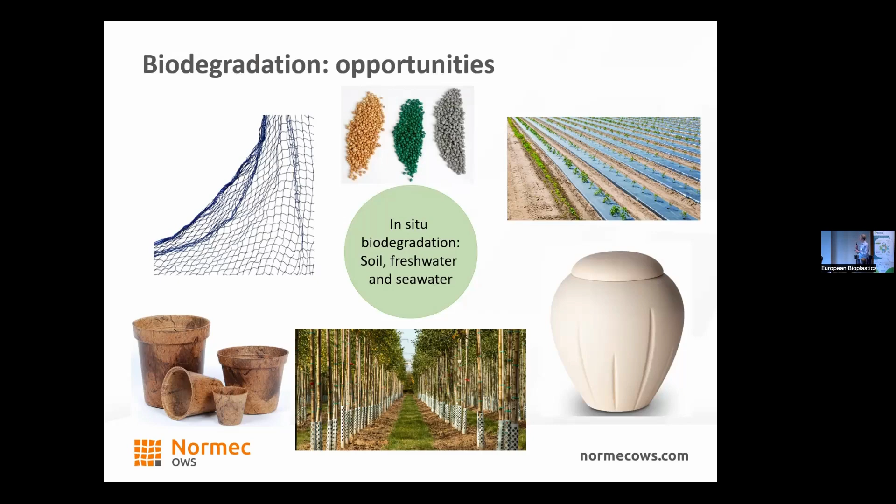But non-persistency is also an important thing. A lot of materials get into the environment not because we want them to, but just through wear - you see shoes and tires, that's problematic. We have a lot of microplastic coming from textiles too, as it cannot be recycled in a good way.

And of course smoking is not allowed, it's not good, but you see a lot of cigarette butts in the environment, and they should be degradable. This, of course, is due to human behavior - these issues are not less due to human behavior - and that's a fact we also have to work with.

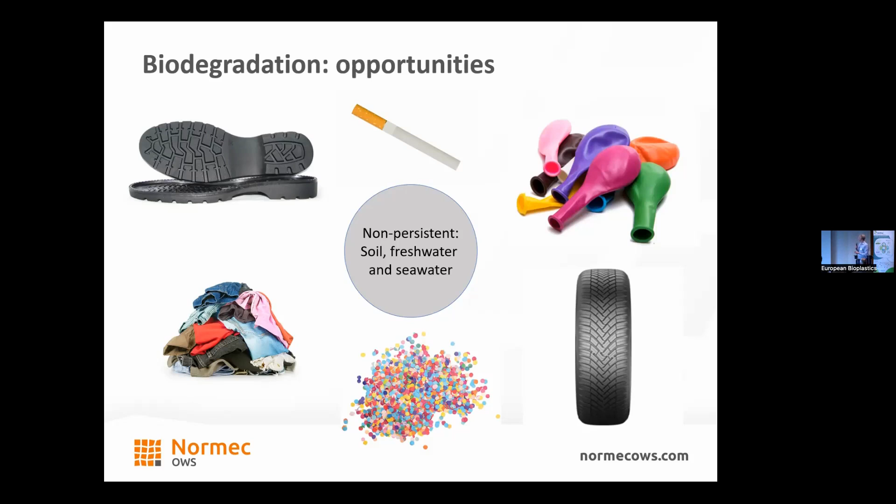The importance of biodegradation is getting more and more recognized in policy and legislation. There's now an EU fertilizer products regulation set up in 2019, and they say that by July 2024 we need to assess the biodegradation criteria that these fertilizers, like slow release fertilizers, should be fulfilling. The goal is to have 90% organic carbon conversion into CO2, with a duration of 4 years. They will test it in soil, and probably water conditions will also be needed, but it's still under work.

Also, ECHA has proposed a restriction targeting intentionally added microplastics. Microplastics are defined as plastics smaller than 5 millimeters. This is not yet set, they had set this proposal, and we were active in this also.

The first tier is by doing screening biodegradation tests. You have tried a tiered approach according to the OECD guidelines. However, for plastics, for polymers, they will not fulfill these requirements as it's quite short duration and then only aquatic degradation testing.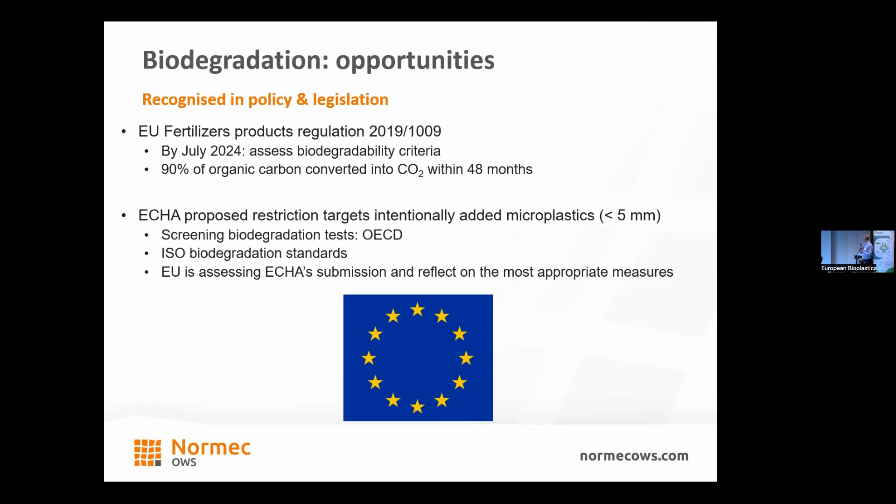So we are allowed also to follow the standard ISO procedures like ISO 14855 and ISO 17556 in soil. They have made a proposal, and ECHA, currently EU, is assessing this proposal and reflecting on how to develop the most appropriate measures. So there's work going on in this field.

Now, also important to know, environment is an important factor for biodegradation. A material that is compostable may not be biodegradable in water, in marine conditions, or in soil. And there are two main reasons for that.

Compost is generally to be considered as the most aggressive environment, certainly industrial composting, because there you have high temperatures, up to 60, 70 degrees, and you have the presence of a lot of fungi, bacteria, and actinomycetes. These fungi are often needed to degrade the more recalcitrant materials, also needed for degradation of lignin, this natural material, but only due to the activity of fungi can they be degraded.

For home composting, you have lower temperatures, so that's already one reason why the degradation is going on slower. Soil is less aggressive compared to these two. The main reason is that bacteria are present, but not at that high concentration as in compost, and also the low temperatures. For fresh and marine environments, there seems in general to be less aggressive conditions when there is a need of fungi for degradation. In these environments, fungi are present, but they are not so active as in soil and compost.

Landfill is not really a good option in Europe. There's a ban on that, and we agree on that. Also anaerobic digestion has a little bit different behavior. In anaerobic digestion, we have mainly bacterial activities, but there's another kind of bacteria than in the aerobic processes.

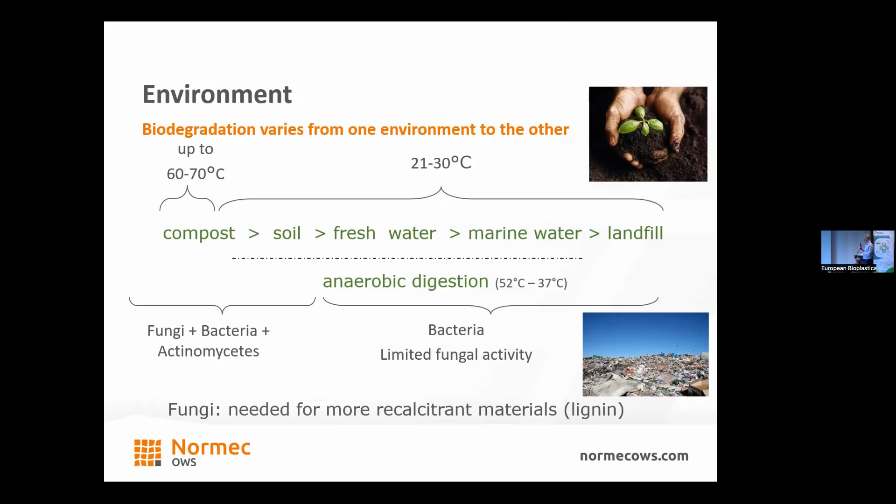Here's some kind of overview of the materials we made with Nova, which we will also update, showing in which environment each material will degrade. So cellulose is a natural material, it can degrade in any environment. This is the same as PHB, already discussed from the project before.

For PLA, it's interesting, only two environments are considered here: industrial composting and thermophilic anaerobic digestion. Why? PLA needs this thermal trigger to start the degradation, start the hydrolysis, and to be completed biodegradable. PBS also not that much, and PCL, yeah, you see mainly in soil and industrial compost, but depending on the application, on the type, it can also be in water conditions.

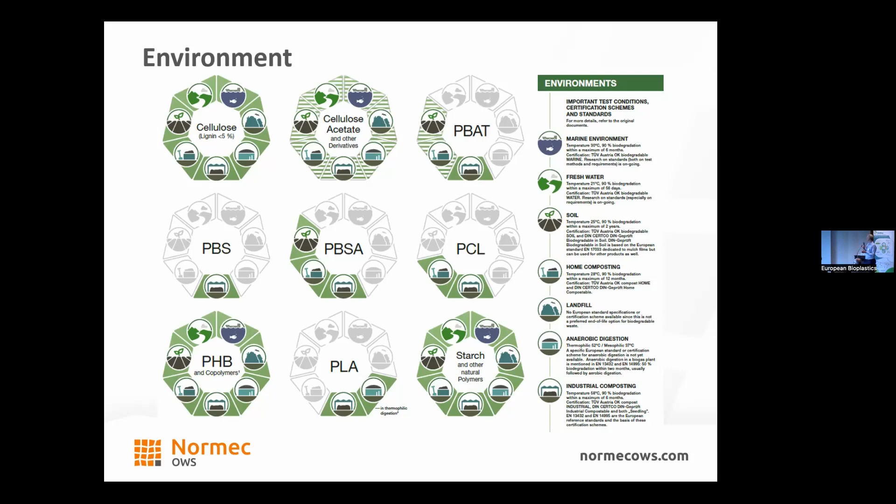So for all of them, this is not fixed in stone. It's also depending on the molecular weight of your material or other characteristics like crystallinity. So it should still be checked.

Now, some examples of EU research we are involved in, where we show that biodegradation can be a nice issue. This is, of course, the BIONTOP project, which we like very much, and it had the goal to develop novel packaging films and textiles. We wanted them to be bio-based and also biodegradable at mild conditions. As also mentioned by Raoul, our start material, Raphael, our start material was PLA. Why? It's bio-based, it's biodegradable, and at the moment also mostly affordable, and quite high production capacity is already available.

But we know that PLA needs a thermal trigger before it starts degrading. In home compost conditions, you don't have these high temperatures, you only start working at 28 degrees as defined by the standards. But we still achieved home compostable products by blending with PCL or PBSA. It's of course depending on the type of PLA, but you can really see that the higher the amount of PCL, the quicker the degradation starts. So we could also play with the biodegradation rate.

We could tune the biodegradation, which might be an interesting application also for soil applications in agriculture, so that there is a long duration without any degradation, and then afterwards it starts degrading. Even with the addition of only 5% PCL, we could obtain a material that was completely home compostable.

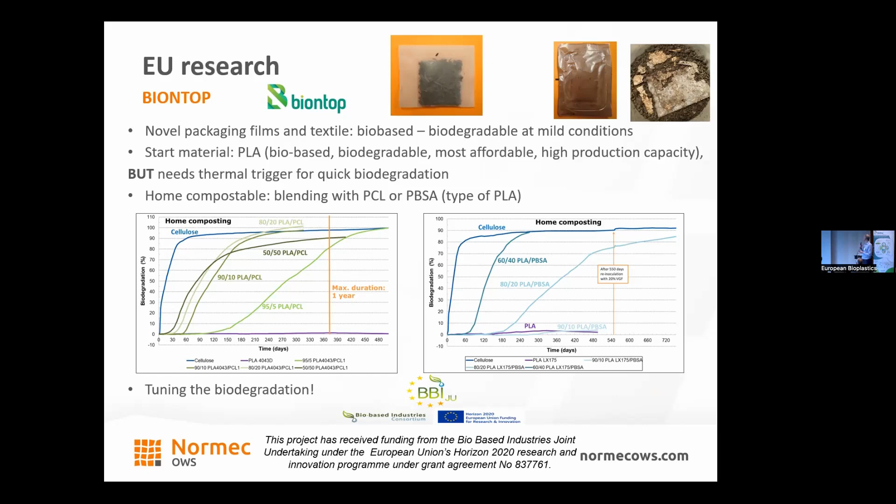And a similar approach we used together with the University of Pisa, working with blending with PBSA, as this is a bio-based material. We show there that PLA mixed with PBSA can also be home compostable. So these are very nice results.

Another project we are involved in will be explained later in more detail by Amparo. It's SEALIVE.

The goal was to bring advanced bio-based plastic solutions to the market. Several demonstrators will be produced and developed for land application and for sea. For land, we go for rigid and flexible packaging and also agricultural applications. In sea, we look at deep frozen films, fish crates, oyster mesh bags, and fishing nets.

In this research project, there's also an important part on policy and standardization, and we are quite involved in standardization work, setting up new test procedures, setting up new standards, and helping them to benefit later on for the EU Commission and for the environment.

So we are setting up marine toxicity tests for biodegradable polymers, as they are different from chemicals. You need a degradation phase to allow the residuals to form and then to check the toxicity.

We also drafted an anaerobic digestion standard with specification. There is a good standard on industrial composting, but there isn't really one yet for biogasification, for the treatment of plastics in an anaerobic digestion plant.

So we made some suggestions, and we did some marine disintegration trials. We compared lab tests with field tests, with real life field testing, together with a partner, Seabird. And we tested several materials: cellulose, cotton, PBS, PBSA, PHBV, and PLA.

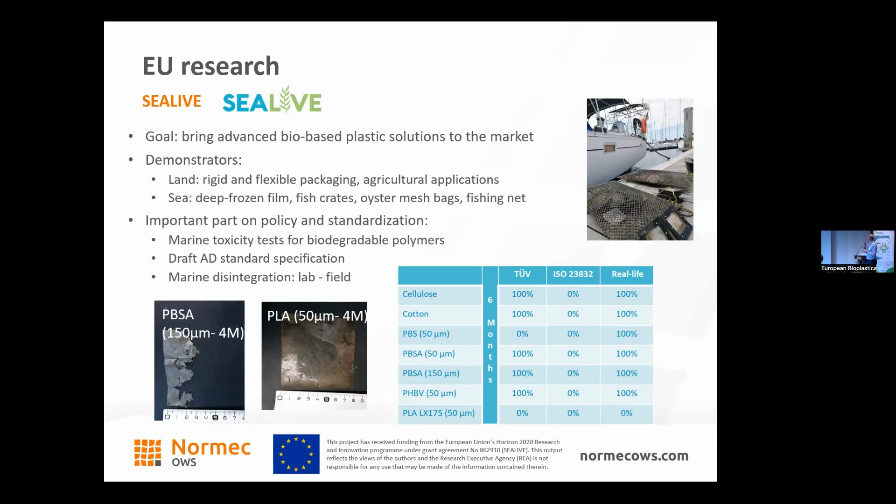Another project is the MyFi project. Here we have the ambition to provide the textile industry with a new non-woven fabric material made of mycelium fibers. It's a natural material, and it should have improved performance and reduced environmental impact compared to current materials.

So they have some interesting environmental objectives: to reduce the use of chemicals and natural sources, to be bio-based so we have a low carbon footprint, also to be circular, and the start material is waste that they let the fungi grow on. The option is also to have a biodegradable material at the end.

I think this is the last one I will discuss, the Unlock project. Here we want to release the potential of feathers to foster circularity in agriculture. So we start with feathers, waste from the poultry industry. These are keratin-based materials, with the objective to have zero waste and also controlled biodegradability.

So that's like for a mulch film, depending on the growth you have on the plants, you have a quicker or slower degradation. And the final goal is also, because the materials are rich in nitrogen, that you can enrich the soil and have a nicely fertilized soil.

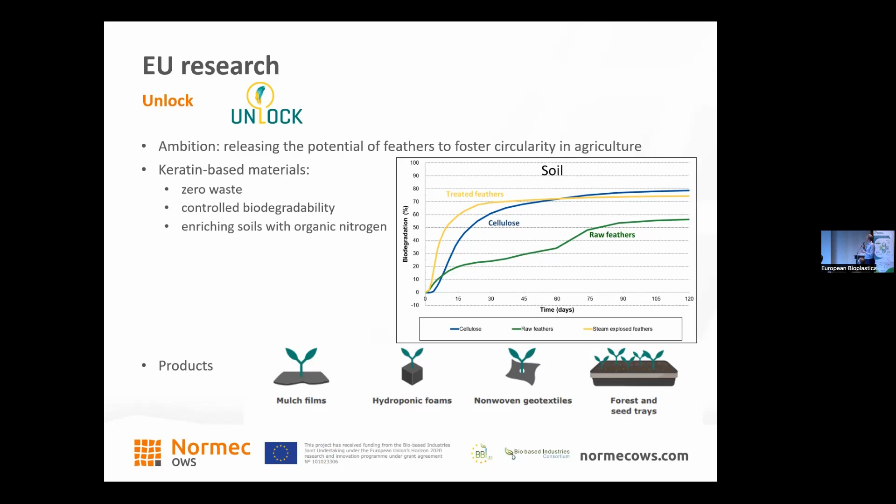I think this was the last one, but we are involved in many more projects, and we also want to help. We are available for a new project if desired. Thank you.

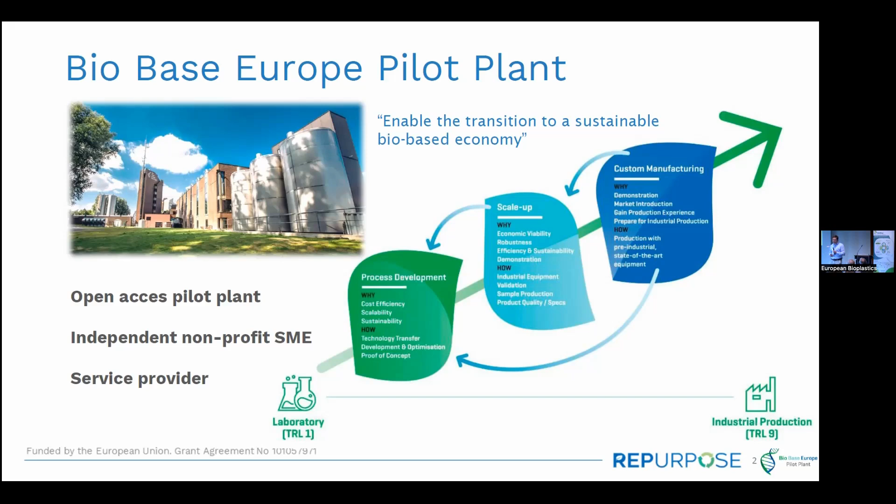I will explain a little bit about our REPurpose project, as it is a fairly new project. It only started a couple of months ago, in September last year. I will not be able to present results today, as we are still working on that, but I will explain our concept and the topic where our project is granted in, being safe and sustainable by design polymeric materials. Here you can see an overview of the partners, of which some are here as well, nicely spread around Europe.

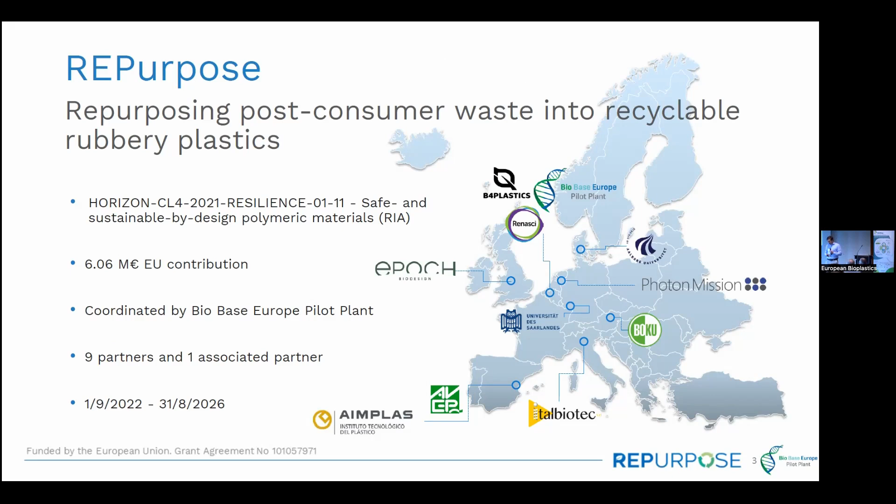Our concept of REPurpose is targeting elastomeric plastics, for example towards consumer goods, automobile applications, and construction. To develop these elastomeric compounds, we are starting from waste materials - two types of waste materials, namely paper and cardboard waste and plastic waste.

The paper and cardboard waste is actually a waste stream that is difficult to recycle, or difficult to get back into the loop for the paper and cardboard industry, which has not a lot of value there. However, for companies like us, in fermentation technology, it still has a lot of value, because it's cellulosic, so it contains still a lot of glucose and fermentable sugars. We can make use of those sugars to create or synthesize new molecules.

So we're using pre-treated paper and cardboard. We are enzymatically hydrolyzing this to glucose and xylose, and using the glucose and xylose to ferment it into new products. Typically it's about diacids, diols, which we can use then for our polymers. That is one value stream.

The second stream is plastic waste, typically polyester plastic waste - for example PET, but can also be PVC and so on. Again, here we are using more or less the same strategy. We will enzymatically depolymerize this plastic waste into the building blocks, and then we combine these building blocks with the building blocks obtained from our paper and cardboard waste, making use of that entire pool of building blocks to create new elastomeric polymers, which we are calling our REP polymers.

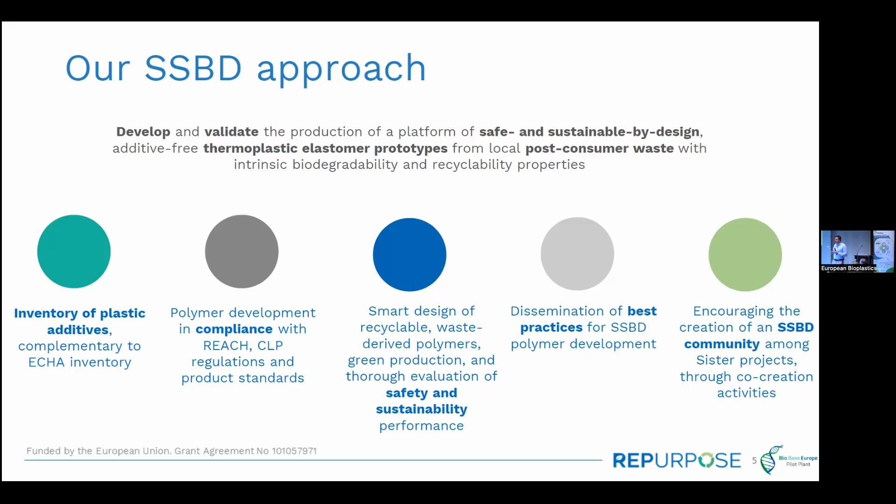Here on my slide, the best practices in that. Of course, we don't want to make polymers only for ourselves. We want to make real applications, real prototypes, and there we are strongly engaging our end user group.

We have several companies involved where we ask for advice, where we want to steer these properties of these polymers by changing the composition. So we have a very broad spectrum that we can cover, but we of course want to create products useful for the companies. We have several companies involved, for example big names like Trelleborg and Bosch, that are helping and advising us in which direction we need to synthesize these polymers.

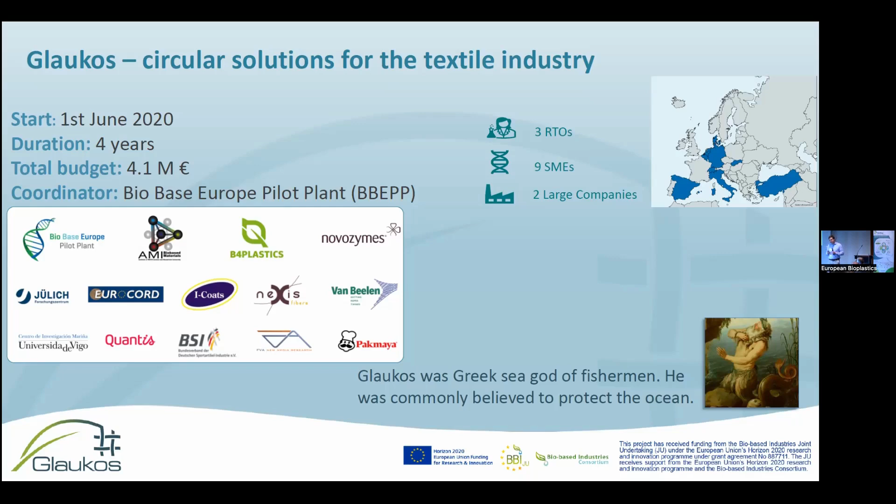But of course, these types of textiles need very stringent specifications, which makes it not that easy to develop these polymers. In short, I will not stand too long on this slide - it has more or less the same concept as the REPurpose project, where we want to start from a renewable feedstock, making use of microbial fermentation technology to create and synthesize these building blocks, which are polymerized into the target polymers for these textile applications.

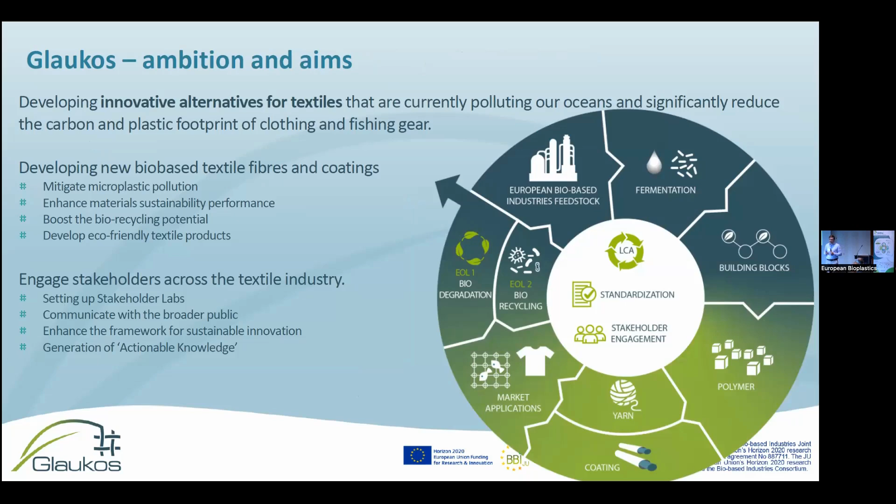Within the GLAUKOS project, there are several workshops being organized, and they have determined several challenges that come with the development of these biodegradable textile polymers. These different types of workshops are divided amongst some main topics.

Of course, you have the technical challenge: how do you get to those certain specifications that the fishing nets need? But it's also about, for example, the end of life, which you already had a presentation on. It's about LCA, a topic we already talked about. But maybe even more important is raising awareness, involving all the stakeholders, and making sure that the public is aware of that.

So there are several workshops around these different topics being organized, one as well next month. So I warmly invite you to join and to listen.

If you want to know a little bit more about these workshops, here you have the project website and the QR code. If you have any questions on this project particularly, because I'm not following that up, my colleague Sophie will be very happy to answer any of your questions. All right, thank you very much.